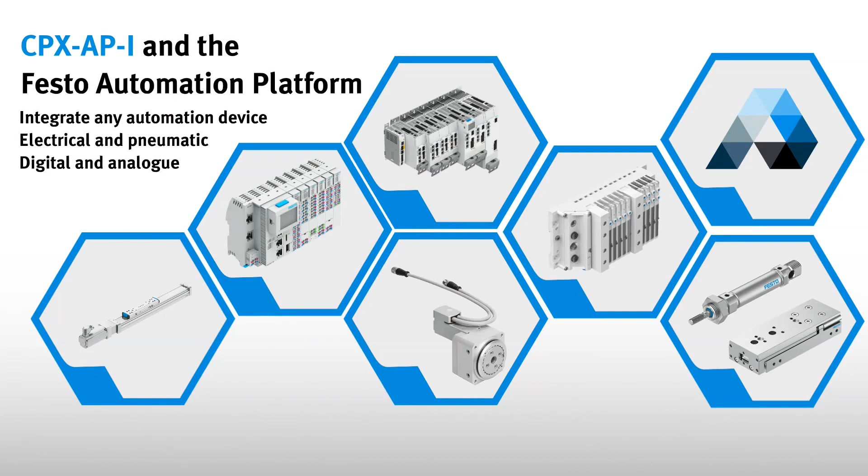Awesome. Hopefully you guys will have a better idea of this. Marcus, before you continue, why another remote I/O to the marketplace? Why is there a need? Russell, that's actually a very good question, and it's quite easy to answer.

We want to add value to the customers, and the majority of our customers use our pneumatic valves. And yes, there are other people that manufacture remote I/O, but our benefit is we can get direct access into the more cost-effective valve terminals, getting things like valve cycle count, cable quality monitoring, all of which the other competitors can't. So it gives you the added benefit of reduced equipment in the pneumatic factory automation space. And from one supplier, I suppose, eh? One supplier, everything can be done.

Fantastic. Thanks, Russell. So when it comes to the AP-I, it's our standard new technology. We're actually incorporating this new AP technology, which is high-speed technology, into all of our equipment, from our normal CPX valve terminals to the CPX-AP-I Remote I/O. And looking at industrial automation and where it's going, Industry 4.0 is what we need to take into account. And this is where the CPX-AP-I remote really comes in. It enables big data, high speeds, taking all that data and diagnostics from component level, as simple as a valve, up into the cloud.

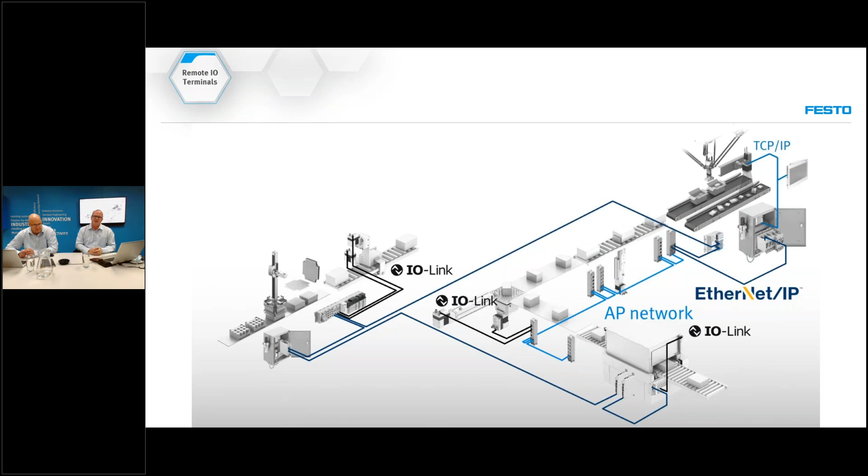So that's 30 times 4 IO-Link devices on one master. So for those of you that don't know what our competitor products look like, that's what you see in the industry. IFM, Siemens, they all have this type of technology. So what makes ours, like you said, better or more suitable for you guys?

So if we look at it, it's less interface cost. We can go directly into a valve terminal without needing a separate communication module. I'll show you now where we can save about 200 euros. So I'm going to compare against Siemens at the moment because, let's face it, they are the biggest in the industry. So let's benchmark against the big guys and let's see if we can knock them out.

So now we look at our competitor solution where they've got a Siemens PLC. Both our solution and theirs have a Siemens PLC. Same amount of I/O and valve terminals, and our solution ends up 200 euros cheaper. 200 euro? 200 euros, not 200 rand, 200 euros.

Plus, we've got the option of being able to send that data up into the cloud with our CPX IoT unit. We also have, like I said, that benefit of valve cycle count. So now we can start doing predictive maintenance for when a valve is deemed to reach its life end. So you can start preventing failures and downtime. So with our remote I/O, we can actually derive the true benefits of a valve terminal technology as well.

That's correct, yes. So you don't need to go for the flagship CPX valve terminal that gets all that diagnostics. You can use the VTUG that's assembled locally in Isando, as well as the MPA-L, which is the most cost-effective valve terminal. That's good to hear.

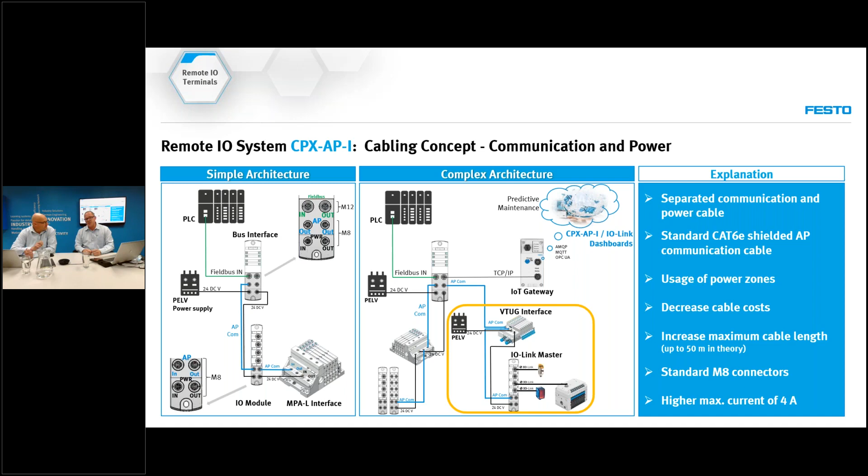So we don't use specialized cables, a single cable where the power and the comms is in one. We use standard M8 connectors, which means standard cables. Once again, easily available and a lot more cost effective. Are you limited to distance then? We do up to 15 meters between modules, and we will be releasing the 50. That's 50 meters between modules. Sure. So that really does give it to you.

So yeah, let's have a look at the last knockout to give that punch up to the big guys. So compared against Siemens, we're 8 times bigger in terms of network capability, double the speed with a lot more flexibility. And of course, we can then go directly into the valve terminal without the additional modules.

So the last benefit of this CPX-AP-I remote is what we refer to as steady architecture. And that means for you as OEM, you build machine 1 for customer A that wants one type of PLC, and then you build machine 2, the exact same machine, for customer B that wants a different PLC. Now you have to change all the hardware down below. Well, if you standardize with Festo, you don't need to.

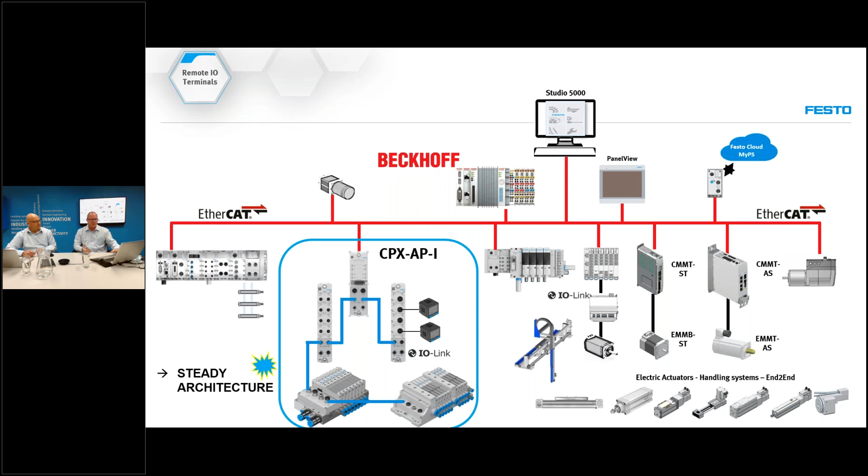Anything below the PLC, all that we do is we change the main protocol, the bus, and then from there, you've got all the same. So whether you've got a Beckhoff, a Siemens, or perhaps an Omron, we just change the communication protocol. That means you can build the machine faster, reduce your spares, reduce your stock holding, and the only thing you need to change is the PLC. So drawing, stock, all of that stays the same.

All right, so why is this such a good device? In the presentation, you're more than welcome to read through some of those. But at the end of the day, like Russell said, it's one supplier, one stream of components, and it's just a lot easier and simpler to install. But that's enough about me on the CPX-AP-I. I'm going to hand over to Russell on the DFPC.

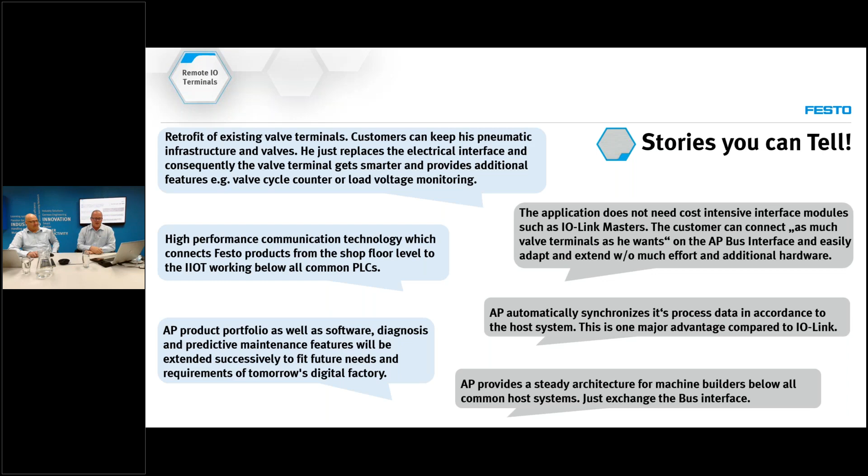Teach me, Russell, what is this DFPC? Okay, well, it's Festo's new generation compact linear cylinder, but it's designed around the process automation industry. So Festo, as you know, has a whole variety of pneumatic cylinders, which are used in typical factory automation applications. But what we have been lacking for the last while now is a compact cylinder.

As I said, compact; they often call it the pancake cylinder because there's very small end caps, but a cylinder designed around the process automation industry, specific to it and at an affordable price. And this unit itself does the trick. Let me show you why, Marcus.

So if you take a look at the offering, we have the DSBC, DSBG range. It's ISO-based cylinders. And now the DFPC comes in between, so it fits both the ISO 15552 protocol as well as the ISO 5210, which is the ISO standard itself. So it means that we have a cylinder that can work for both ISO standards, and its design purpose is set for the process automation industry itself.

It does mean, though, that the DLP, which you have come to know, is being phased out. And as I said, that was a more expensive offering to the marketplace. The DFPC is between 40 and 50% less than the DLP, which is a significant saving. It's a lot of money. That's a lot. All right.

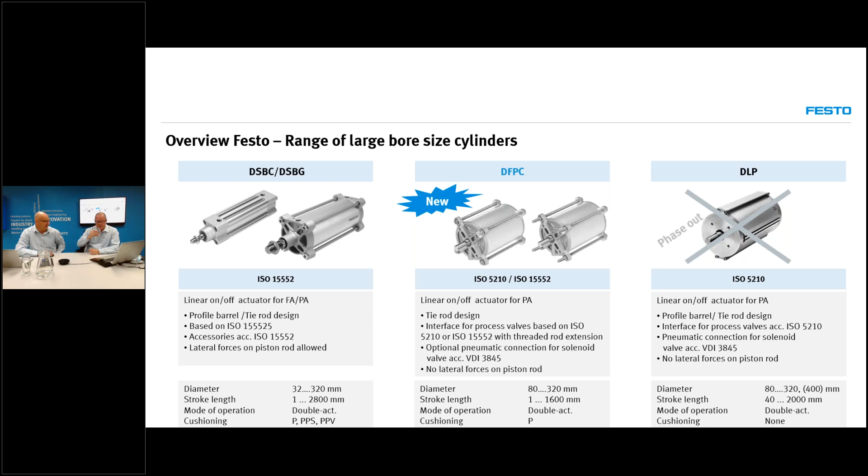If we take a look at the design, what's very different about it, and as I said, I referred to the pancake cylinder design, it has very thin end caps, so it's not meant for lateral loads, and it doesn't have a bearing cap. So like a typical cylinder, you can apply a lot of load to the rod, and it's supported by the bearing cap in the front end. This doesn't have that. But the application is designed around the process valves.

So it sits with, for example, a knife gate valve, where there's no linear or lateral load in the rod itself. It's guided on the outside. Guided by the outside. Exactly. All right. And this design, of course, optimizes the production cost and the selling prices itself.

So as I already mentioned to you, typical applications are things like knife gate valves, slurry valves, pinch valves, penstock valves, and butterfly valves with side crank mechanisms. So you can see it really is designed around process valve suppliers and process valve manufacturers and those who want to automate their process valves.

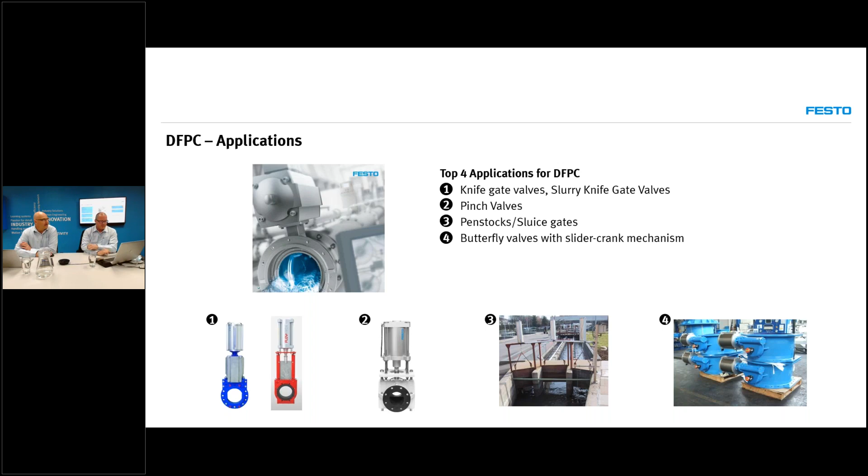And already we have signed up some very large international agreements with suppliers of these into the industry. So it's showing that the item itself is getting lots of traction. Okay. Thank you, Marcus. All right, let's take a look at some of the features.

So it is currently in double acting, guys, but there is talk about going into single acting at some point in time as well. The piston diameter sizes right now are 80, 100, 125, and 160, and soon to be released is a 250 and 320. I apologize, the 200 has also been released right now. So that's a 200 diameter cylinder, quite a big boy. Yeah, right. And the stroke length is up to 2,000 millimeters. So already we can cater for all process valves out there.

As I said, it has two standards it can facilitate, namely the ISO 5210 and the ISO 15552. It also is configurable. Like all Festo products these days, if you go to the website, you can configure it virtually, and you can extend things like the threads in the front end of the cylinder. So you can extend the mounting threads. You can change the thread on the rod, and you can extend the rod itself. So if you have a purpose-designed process valve and your standards are slightly different, Festo can accommodate you with a configurable tool, simple to use.

Right? Very interesting. Then it comes with ATEX certification, and it has a whole assortment of accessories. Because it shares common platforms, the DSPG and the DFPC, it has the same integrated components. So we can share the same mounting facilities or kits as well. Okay. So it really is an optimized design cylinder, and it's a modular concept. Let's move on.

As I already mentioned, there are a whole bunch of accessories for it. Taking a look at the front end, we have a whole bunch of rod accessories. So it's far more than what you find in the industry. There's a lot you can do with the front end.

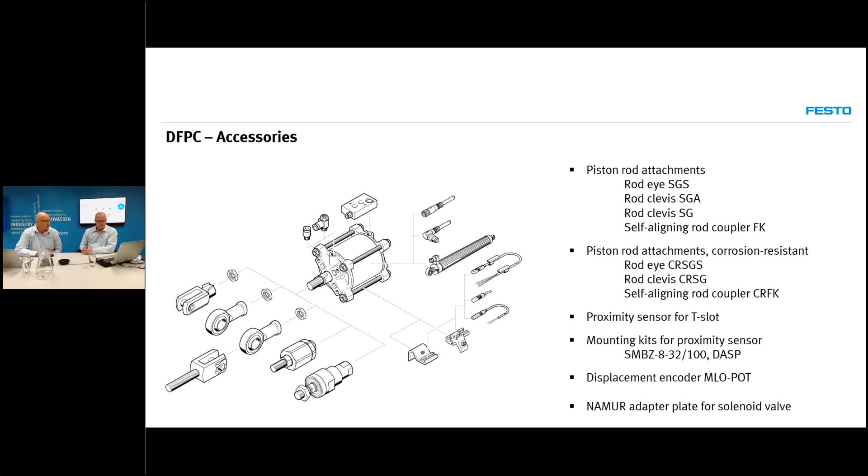All right, Marcus, that's enough said from my side. Over to you. Russell, you were mentioning something there about Namur. What is that Namur? Because to tell you the truth, I've got a Namur output on the PLC just now, and I wasn't sure what that is.

Okay. Marcus, it's a specific interface that is in both mechanical and electrical. In this case, mechanical, which allows you to have a standard in the industry to mount things like pilot solenoid valves to it. So every supplier who has it as a specification, you can take a Namur interface valve, and you can actually mount it to the actuator without any additional pipe work and so forth.

Okay, interesting. All right, but enough about PA for a while. Let's have a look, and we're touching base on simplified motion series. So you might see me trying to scurry here, it's just so that we ensure that we keep to time. All right, so what is the simplified motion series? It is what I call the bridge between electric motion and pneumatic motion. So when you want the accuracy and the consistency of electric motion without the price tag that you normally get with these servo systems. But if I look at the screen, those devices look like pneumatic devices.

Some of them do, yes. And that's the whole thing about Festo. We've tried to use the same mechanics, and all the mechanics that you see on the simplified motion are the exact same as what you can get standard, where you can use either standard stepper or servo equipment. So if you look at a standard, let's say a 50-bore pneumatic cylinder, we've got the electrical cylinder version. If you look at a rodless cylinder, we've got the belt drive version. So exactly what you've got in the pneumatics, we've got a direct replacement on the electrical side.

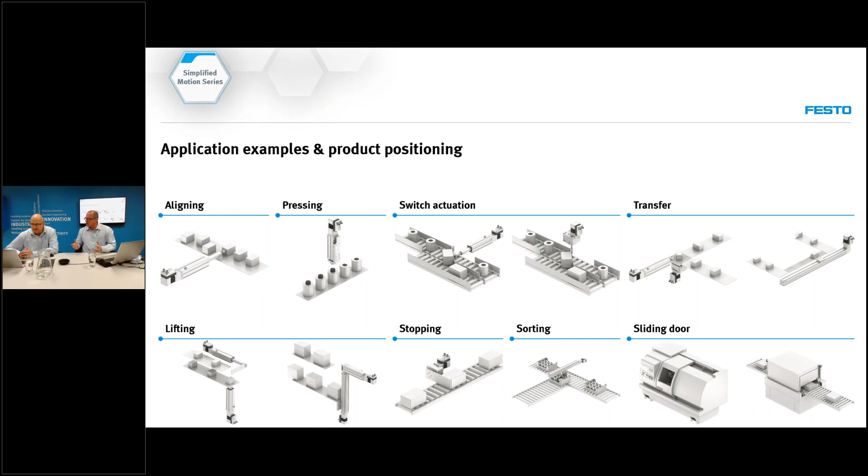So if you want to transfer maybe from left to right, maybe pick it up on the top level, a stacking type system, or if you want to stop a product in the line, this is where you can use the simplified motion. So this is the equivalent of a pneumatic on-off application, right? That's correct. Okay. But there is a little bit more, and I'm going to touch base on it now. All right. But to bring it into line and context with pneumatics, let's have a look at what you need from a pneumatic perspective versus what you can do with the simplified motion series.

So you'll see on the top there are PLCs on both the pneumatic and the electrical side, but what's below it is where it's different. If we look on the left-hand side, where the simplified motion series is, there's one axis, one part number. So it's the motor, the axis, and the controller in one. So it gets its supply and its control from the same PLC. And if you compare that to the pneumatics, we have our supply being the 6-bar air pressure.

So that'll be the 24 volt. Now for the pneumatic side, you need a pressure regulator. You then need a valve. You then need piping to the cylinder, and you have to do flow controls, and you have to incorporate the sensors. So now you've got 1, 2, 3, 4, 5 components, where with the Simplified Motion Series, you've got one component, one axis, one part number. So reduced maintenance, reduced installation complexity, and it's really designed for very simple applications.

So I'm going to share with you 2 applications that we've done in South Africa, and just quickly touch on the benefits, what were the USPs, the unique selling points. On the left-hand side, we look at where we're dosing food into a conveyor. What we could do there is get rid of the pneumatics that were becoming inconsistent because of the temperature changes in the factory. They were getting condensation in the line, and that was causing problems with the valve in the cylinder. Now with this electric cylinder on there, they had positional feedback throughout the whole stroke, so they could measure the status of the flap valve.

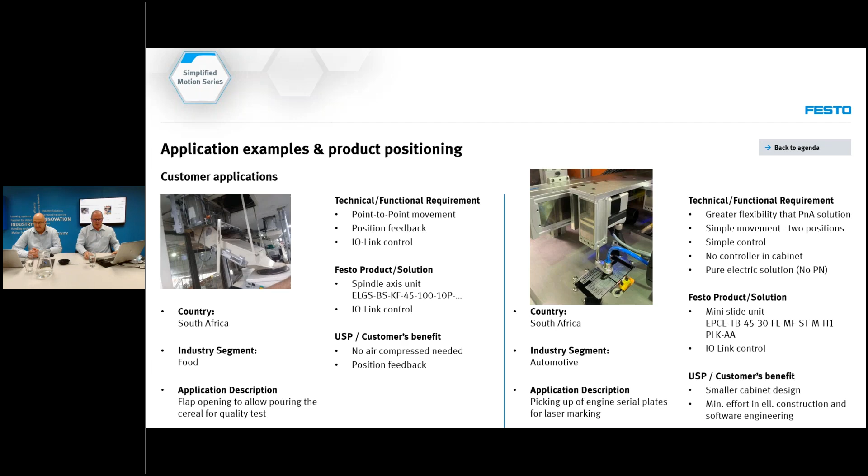Then looking at some of the new benefits, from Q3 this year, you get a parallel kit for more space constraint. So once again, let's just recap. Control with 2 signals, one to extend, one to retract. You get signals out that simulate proximity sensors once they're in those positions. And you need no laptop. All of the configuration is done on the keypad, on the actual controller itself. So no laptop required, no high levels of skill. And of course, by using IO-Link, you now get advanced features like midway positioning. So it's no longer just 2 positions. You can now have what they call an intermediate position.

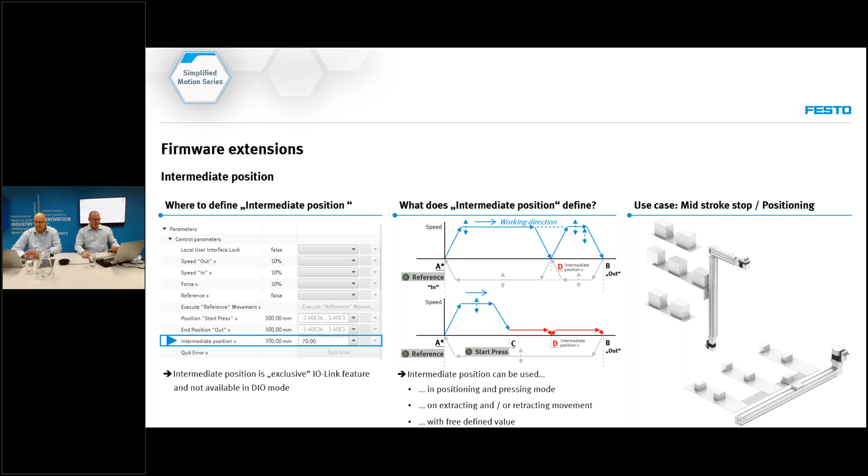Then the last thing I wanted to bring to the table on Simplified Motion Series is the actual software to size this. If you go to festo.com/SMS, you get the SMS Designer Studio, the selection software. All you need is to know your actuator type: a cylinder, a belt drive. You need to know the stroke length. You also need to know the mass. So let's say we want to move a 1 kilo pack at 500 mil, that type of data. You use the sliders on the website. It will then give you the selected size Simplified Motion Series unit.

You then click add to basket, and it'll give you the optional extras, say a rod clevis, etc. And you say order, simple installation. So now you've got a simple solution for simple applications. The ordering process is simple. And enough of this simple guy talking. I'm going to hand back to you on the DFPI.

Thank you. I must confess, Marcus, I played with the software last night because I was very intrigued, and it is really simple to use. That's the whole beauty of it. It takes the mystery out of electric automation, electric drives, and it provides you a simple solution, but a guaranteed solution. Yeah, a guaranteed solution, exactly. All right. So the DFPI is Festo's proportional linear cylinder.

Right? The pneumatic version. Pneumatic version, all right. And it's been designed specifically with mining and harsh conditions in mind. In other words, it's been designed for very crude, rough conditions where you're exposed to environmental factors and chemicals and wind and rain and so forth. So you don't have to house it inside some pretty cabinet. It's designed to work outdoors.

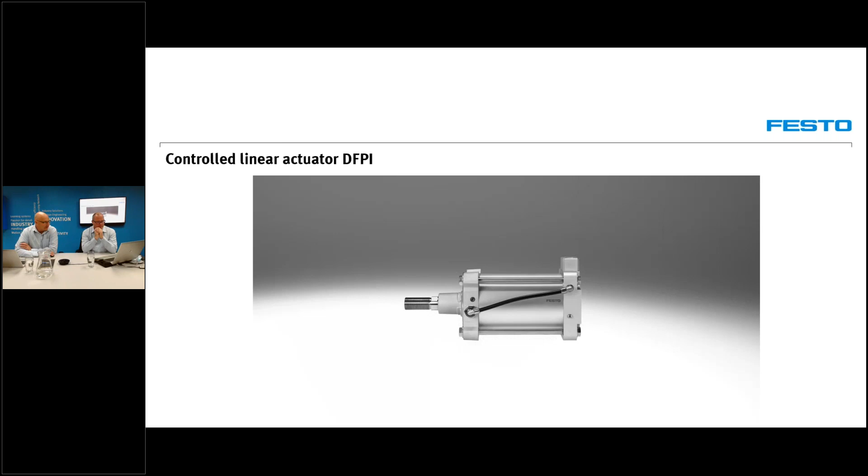All right. It's been around the marketplace for a while, but I thought it's actually very relevant to discuss it again now because we've had lots of interest in this unit recently. All right. So it comes in 2 forms. All units come standard with an integrated potentiometer. And the second unit comes with an optional position controller. In other words, inside the same housing is a pneumatic position controller itself.

All right. So you don't have to pipe on an additional one. Exactly. Not just that though, everything is now housed inside this protective housing, so it's kept away from the elements. So it really is versatile. If we take a look at the design, the potentiometer, as I said, is standard. It's inside the actual housing itself, and then to the rear end on the image, you can see where the positioner is, and that's the optional part.

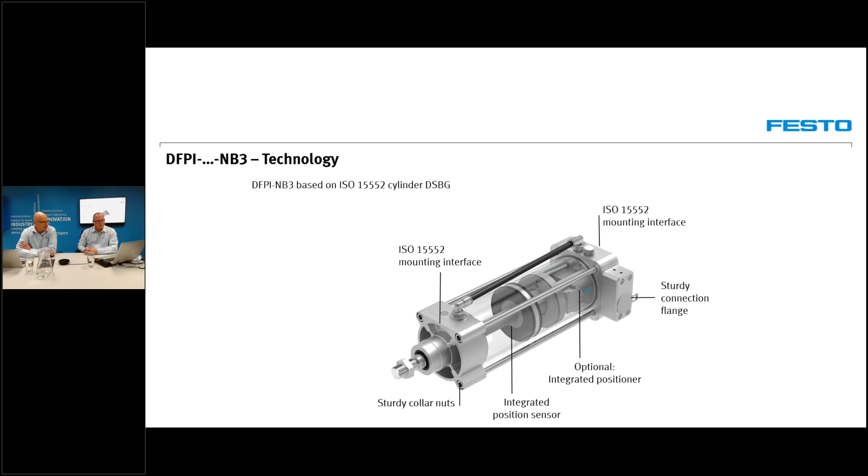And it conforms to the same DSBG ISO standard cylinder. So it's a very rugged, robust unit. They actually took the DSBG and re-engineered it to accommodate all these components. So by no means is this level of sophistication compromised. In fact, you have the same durability and robustness of a product, but just with more control. So as I said, it's been designed for very harsh conditions, but also it's been designed with accuracy.

Is that the same as what you normally see when they do these whiskey things that rattle and clink because they're worn all over the place? Yeah, pretty much like that. You find this system actually in the mines for dart valve control. And it's sort of become an industry norm over the last couple of years. And actually, we're having great success in retrofitting our units to these because the control we get from ours is far, far better.

You can imagine, Marcus, if you're exposed to all these environmental conditions, the mechanical linkages become worn and vibration settles in and starts making things move out of alignment. So you're always recalibrating things and trying to tweak and tune things, right? And then, of course, in the plant environment, people step on things, break things, knock things by mistake. So it is a real nightmare. If you want proper control, you need to calibrate the whole time. And besides all the linkages you require, it's very time consuming.

Yeah. So all that is now thrown out the window because all the feedback that you require is now electric or electronic, and it's inside the actual housing itself. So if you've got better control, you've got better output. If you're trying to control something like a precious metal, like in the case of the mines, you have better recovery or better yield as well. So better control leads to what? To economics, to financials. You actually see the benefit in your pocket because you have better product and better yield.

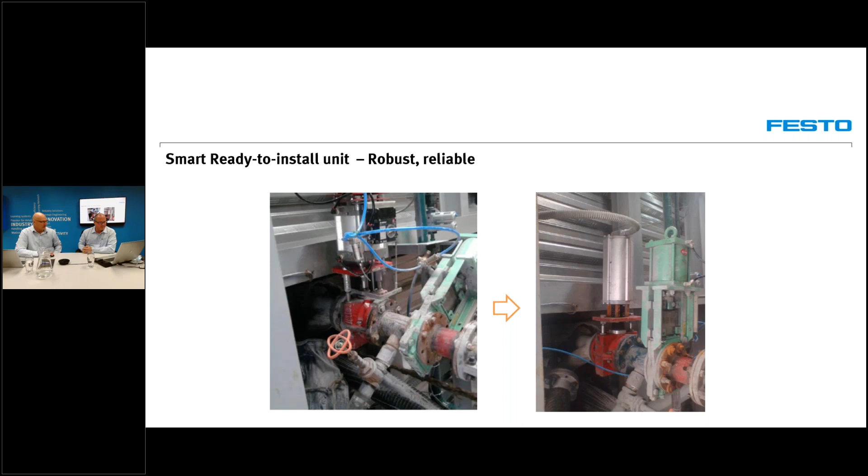And let's try and click through again. And in terms of accessories, let's go back a slide. Sorry, Marcus, I'm navigating on your PC here. Because we have it as part of the DSBG range, all the accessories that are available for the DSBG are available for this. So take a look here, Marcus. You have a whole assortment of front rod clevises, mounting attachments. You have all the sensor control, everything you could possibly think of.

And unlike the DFPC, where you're limited to horizontal and vertical applications, and of course the actual rod is guided, this can take the side load because it has that leg push. And as I already mentioned, this black tube, this conduit, houses all the electrical cables and pneumatic tubes inside there. So everything is kept away from the harsh environments. And then you get that standard from us. You don't have to filter your own cable through there.

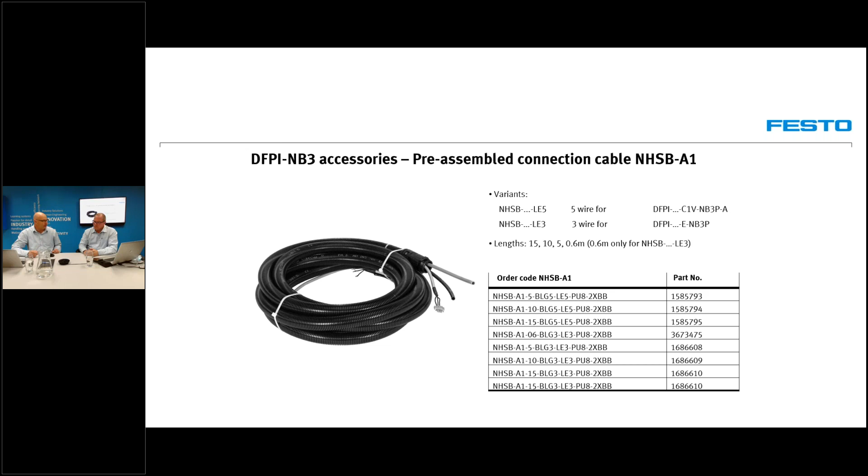Precisely. And I have seen this in real robust applications. The whole entire unit has been covered with material, dirt, slurry, and there's been no penetration of environmental conditions into the tubing and the positioner itself. So it really is meant for these rough applications. But you don't necessarily have to always have a unit with a positioner inside. You can choose to also have it outside.

So we have a bracket system that allows you to mount a Festo positioner, but for that matter, you can mount a Siemens, an ABB, a Samson, whatever you choose to use, outside. So you can attach the brackets to the cylinder itself, the profile, or of course you can choose to mount the positioner in a cabinet somewhere. So very flexible.

So if you think about it, you can have an integrated positioner, you can have the positioner externally mounted onto the actual actuator itself, or you can have that cable up to 15 meters long and mounted in some panel if you want to. Very interesting.

So as I mentioned, it's really a product that's very good for all industries, so chemical, energy, mining, and water, wastewater. So from louver applications through to pinch valves, dart valve control, turbine adjustments, anything that needs to be proportionally linear controlled, this is a device to use. And we have some great success stories from live applications. So burner control typically found in steel plants, to furnace control dampers, all controlled by the DFPI.

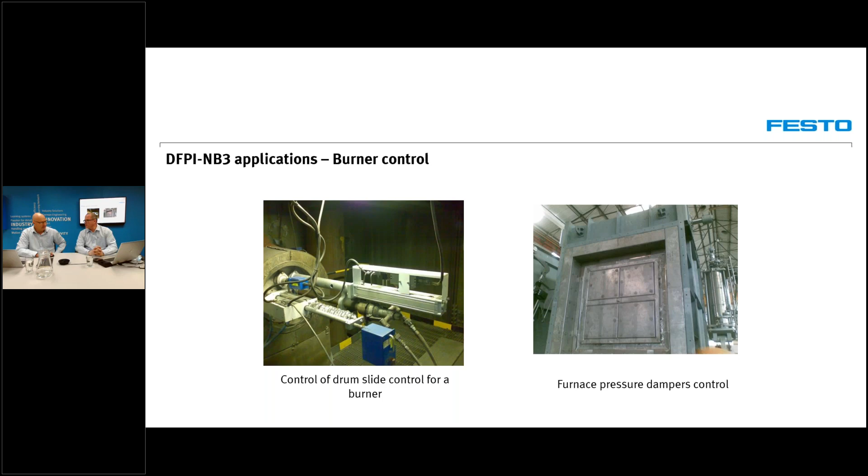Looks like you were traveling the country taking nice photos of all of these applications. No, my job's fantastic, man.

All right, fertilizer production, mineral processing, it really has a multitude of applications. And this traditionally was really a difficulty in the marketplace. Water, wastewater, pulp and paper, and once again, the mining applications. That's a float cell on the right-hand side, Marcus. So we can say that we've actually put it in there. It's not a catalog. It's working. We've got the yield. It's done. It's dusted. It's proven.

It's a proven product, both internationally and locally. So we have some fantastic local stories both in South Africa and Africa. So we really have full confidence behind the solution. Awesome.

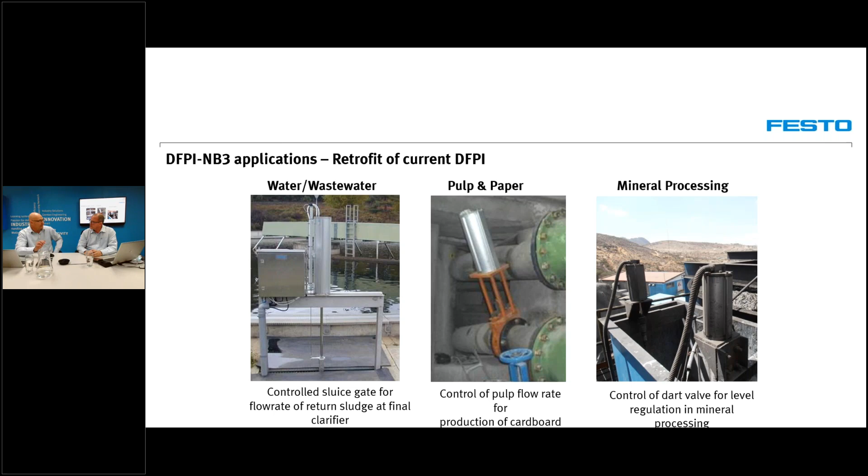What's a fail-safe? Right, good question. Thank you, Marcus. So traditionally, when it comes to pneumatic control, people wanted to fail if there's an air failure, fail to extend or fail to retract. In other words, they wanted to mechanically fail.

Oh, it's not if it's going to fail. So it's not going to fail. Of course, it's not going to fail. It's a Festo product, Marcus.

You put a spring pack either in the front or the back end. So imagine, for example, if air falls away, the cylinder either extends or retracts, as you wish. But in Europe, and I think a growing trend in South Africa too, is that mechanical spring packs are rather dangerous because if you open the thing up, of course, the springs are at a high force. Exactly. And there actually have been some very nasty incidents in the country itself.

So it actually isn't a joke. So what we do in our case, we add an air receiver plus a pneumatic circuit. Okay. So you can imagine, for example, if air fails, you have this receiver called an air battery. And that will then, of course, cause it to extend or retract and actually perhaps give you multiple cycles that you wish to manually override if necessary. So the same as what we would do with the UPS on the electric side. Precisely the same concept. Thank you.

Okay. Marcus, so I believe it's your turn now. I think so. Let me wow the guys with the CPX-E.

So if we look in all the industries, whether we're looking at food and bev, food and pack, the automotive industry, even the mining industry, PLC is control, and that's what we need. So the CPX-E modular PLC is not just a PLC, it's a motion controller as well, and also has the added option where you could create your own remote I/O panel. So the CPX-AP-I is IP65 remote I/O for mounting on the side of the machine. With the CPX-E, you could create an I/O bank, put it into a panel, and wire everything into that. So Festo even gives you both options.

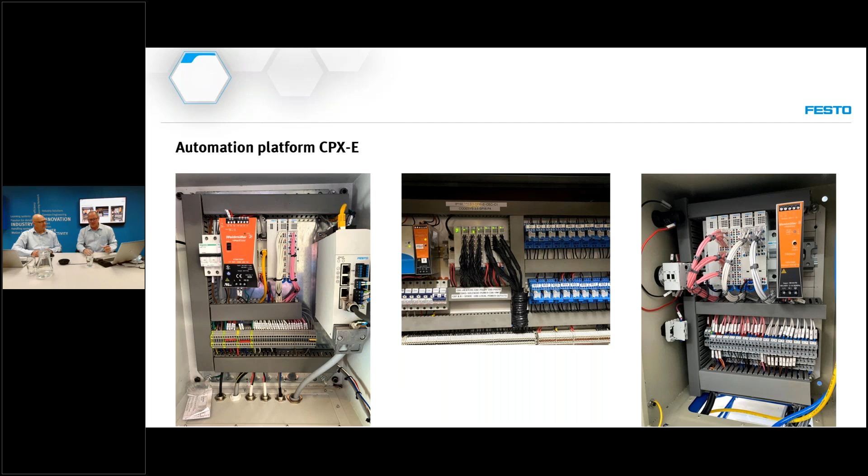So with that being said, if we look at our complete architecture, we have an EtherCAT master on these PLCs with an Ethernet for the HMI and of course vision systems. Festo has their own vision systems, and the EtherCAT master, which we can then connect to either our own servo drives or extra low voltage servo drives or third-party equipment. And I'll show you that a little bit later as well. I'm also led to believe that EtherCAT's particularly fast, right?

It is by far the fastest and most stable communication protocol, in my opinion, out there. And it's also the easiest. You know, when you have 30, 40 modules on, right-click scan, and everything is there, you've got your network configured in minutes. I've challenged our application engineers to prove to me that within 5 clicks in the Festo Automation Suite you can have everything set up, and it is 5 clicks and everything is set up.

Go onto our website, go to the support portal, download Festo provided by Codesys, the latest. All the function blocks are there. The only thing that you might need to pay is if we have to bring in third-party function blocks, but that would be with any Codesys provider. Some of the software providers out there charge you an arm and a leg for software. Some of the guys are charging anything between 70 and 90,000 per year in update costs. So how many PLCs can you buy with that?

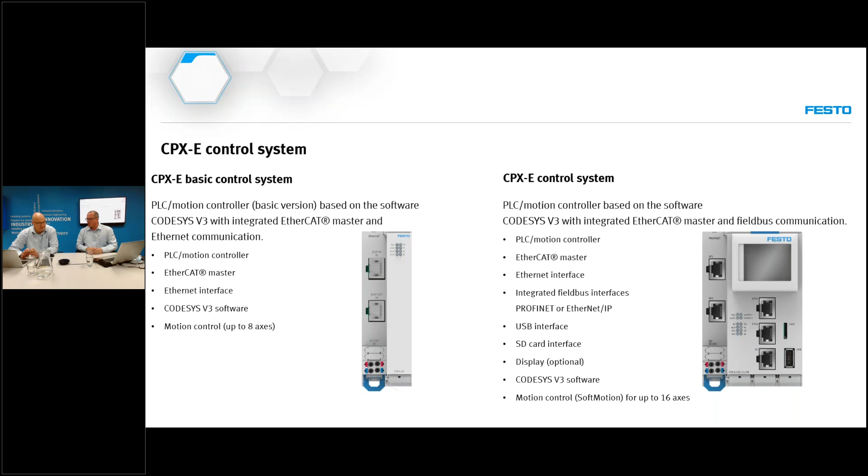So on that, you get 2 versions. You get a C and an M. C is standard, that's the normal PLC control, and the M is the motion. So if you want to do motion control, you take the M version. Once again, no additional licenses, no additional costs.

So I did say in the beginning, you can create your own remote I/O terminal or remote I/O bank. You can do that with Profibus, Profinet, EtherNet/IP, and of course EtherCAT. So it's not just a PLC. No, you can create a separate standalone where there isn't a PLC functionality. It's just a communication module, and you can create an I/O bank. Okay, so you said Profinet, help me out here, Profinet? Profinet, Profibus, yeah. EtherNet/IP, and EtherCAT. Wow, okay.

All right, then a quick overview of what the inputs are. This is where I saw the NAMUR, and I didn't understand why, but you did explain that, thanks. So standard input, 16 digital in, 8 digital out, as well as the NAMUR NE21, so it's in accordance with the higher current rating for the NAMUR valves out there. On the analog side, we've got 4 analog in and 4 analog out. The nice thing about our analogs is they're both current and voltage, so you don't have to have 2 different. It's configurable. You can either have 4 to 20 or 0 to 10, all in the same. So with 4 analog out, you can have 2 current and 2 voltage. You can have 3. You can adjust it as you wish, reducing stock holding again for the customers.

Just talking about PA now, I know that recently they launched the PA toolkit. That's correct. So there's a set of function blocks written specifically for PA applications. That's correct. Wow. So the PA toolkit comes with the HMIs. It's the visualization and the Codesys package that is the industry standard out there. They're still developing that, and look out for the webinar specifically on that, because that's an interesting topic. I think we can do a webinar on just that.

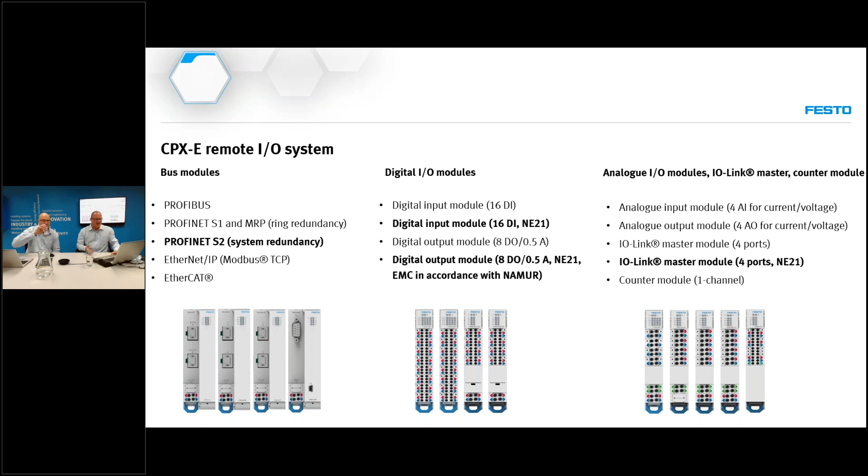Sounds good. Awesome. Then the IO-Link cards, of course, 4 IO-Link masters, and then the encoder card. One of the benefits of these is, again, space saving. So you look at about a 30% width reduction in these. If you compare it to, for instance, a Siemens, we're about 20 to 30% smaller in size for the same amount of IO.

I'll just tell you now, with the cost of panels these days, every bit of saving you can make is a saving you can use. Exactly. Panel cost, if you can make the panel smaller, you save cost.

So you can either have a complete system from Festo where you look at the PLC, the HMI, the IO-Link, the valve terminals, and third-party equipment like the PA equipment, your process, your positioners, your feedback, all of that. You can actually run this as an intermediate, as we said, with a slave, where the main PLC does control, and you do perhaps IO-Link control down in the field.

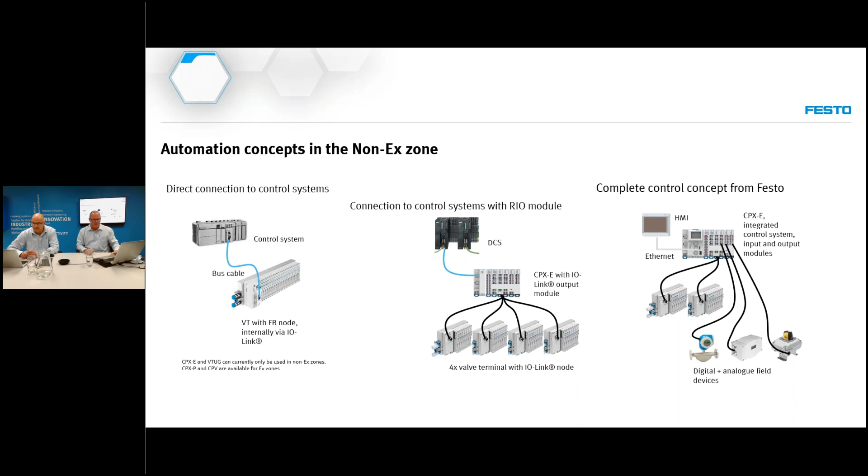One of the nice parts about the installation is the bridging capability. So you don't need to run 24 to each module. You can just jump and daisy chain. It does give you nice flexible ports. So it's easy. You've got an in and an out port to chain your 24 volt. Once again, just making installation cheaper or easier. I shouldn't use the word cheap. Nothing's cheap nowadays. And when we look at time, time is expensive and we want to reduce time.

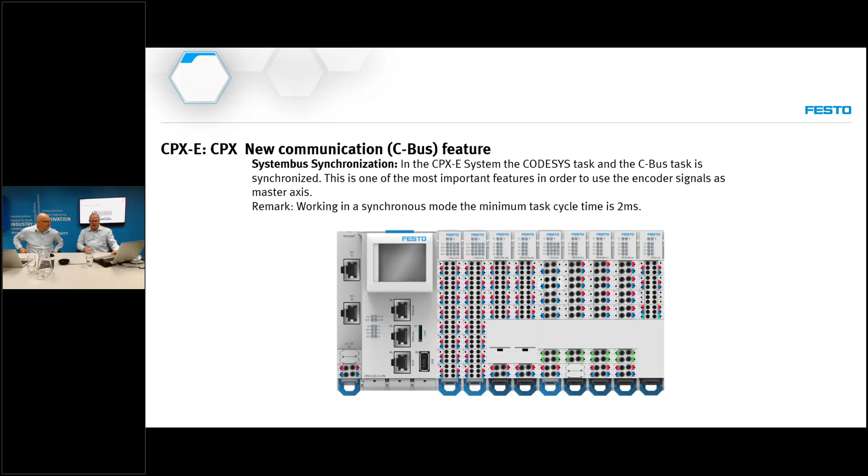Talking about time, if you look at this PLC, because of the C bus running at the back and having synchronized clocks, we can have a scan rate down to 2 milliseconds on these PLCs. That's amazing. So quite a nice, powerful little PLC, modular, and it caters for all of your needs. I can see me using that component in my process industry. Definitely. Would you be able to use that PLC in perhaps your DFPD? Well, it certainly can control the DFPD. Let's do it right now.

So Festo's range of quarter-turn actuators is growing, and I'm going to touch quickly on what we have in place. And we have had it in place for a bit now, the DFPD, and the extensions to the range are very exciting to talk about today, Marcus. So let's climb into it.

I know it's called a quarter-turn actuator, but it actually can do more than that. It can actually do 180 degrees. So for example, if you've got a multi-port valve, this same series, the body's slightly longer, right? And the rack, of course, inside is longer, but the same concept, the same actuator can be used for multi-port applications as well.

It's once again very much aligned to the chemical industry and to the mining industry and to very harsh environments. We have an epoxy coated version as well, the EP version. So the entire unit itself has got an epoxy coating, and then the drive mechanism, the shaft, top and bottom, is also stainless steel. That's a shortcoming of a lot of competitors in the marketplace, Marcus: they're connected to process valves and there's spillage and environmental factors, and the actual drive mechanism rusts or corrodes, even though the epoxy coating is fine. So that's one thing Festo has as a standard.

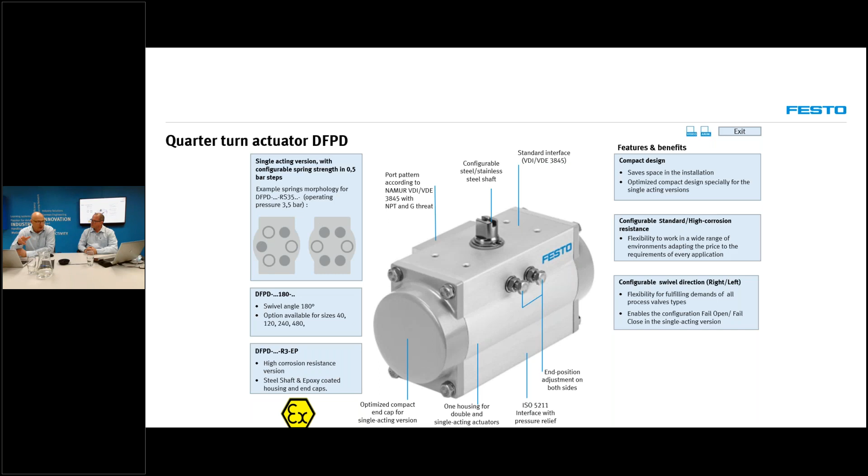What else can I think about? It's a compact design in general. So if you compare it to some of the players in the marketplace, it's a nice compact design. You can configure it online, once again, like the rest of our products. So you can choose whatever you want on the online configuration, but there also are standard versions. You also can choose to have it as open right, open left, in other words, clockwise, anti-clockwise. These are all variants that are available in the range itself.

Now, the exciting part is that we have released up until size 2,300, so from 10 Newton meter to 2,300 Newton meter. But in the next short while, we're releasing the 3,000, the 5,000, and the 8,000 Newton meters as well. But what has been released now is the heavy-duty version. So 9,000, 18,000, and 32,000 Newton meter.

A little bit more powerful than that Ford of yours, eh? Just slightly. Certainly a lot more powerful than the Toyota of yours. Is it as reliable as the Toyota? It's more reliable than your Toyota.

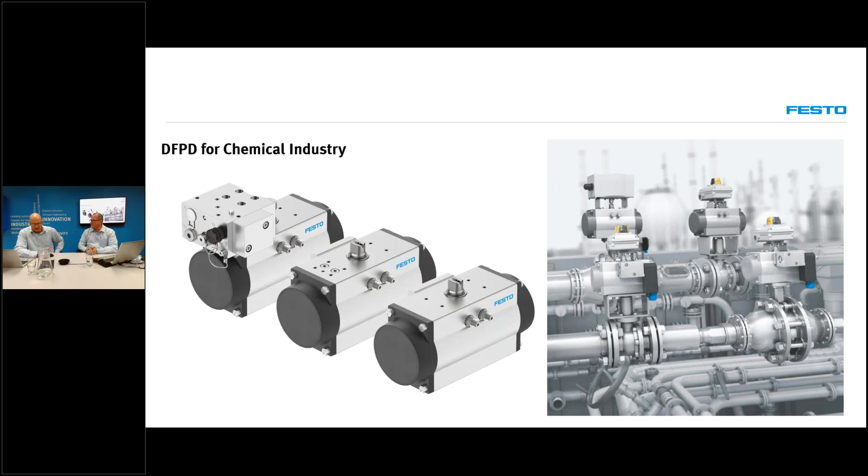Okay. All right. We also have released to the marketplace now the DFPD C, C standing for chemical. Oh, right. Not for corrosion. Not for corrosion, not for Corolla either. Now, the DFPD C, we'll talk in detail about this just now, but it really is an exciting product that we just released.

Let's just shift to the next slide. Whoops, and I've gone too far again. Marcus, you must help me out. You're too excited about this. I know, I've got finger troubles, yeah.

Okay, there we are. All right, so it's been designed specifically for the chemical industry. So it has a couple of things that the current range doesn't have. The end caps are hard anodized, right? The spring pack that I spoke about just now comes with stainless steel inserts. So in other words, it's not susceptible to the corrosion and to the outside conditions.

People always think that a pneumatic device works in isolation, but of course it draws in the atmosphere when it cycles. And that atmosphere contains chemical compounds. If you can smell it, it's in the air. Exactly. And often if you open up an actuator, you'll see the corrosion and the rusted spring sets inside. So we now have as standard in the C version stainless steel spring sets.

Plus it has a shaft centering ring for easy mounting to process valves, once again a request in the marketplace, and blowout proof screws. So this range looks very similar to the DFPD range itself. It is very similar, but it has those few modifications that make it unique to the industry itself.

And I'm also excited to say that they have brought one more innovation out, and that is now the same unit with the 3847 interface. Now, 3845 is standard across all the ranges, but 3847 is a special interface to allow it to mount components to the unit, as opposed to piping up a pneumatic positioner. That spider's nest we saw earlier. Exactly, and more so. You can now mount those components with a series of manifold components to each other, saving you lots of time and effort. So I'm quite excited to talk about it just now.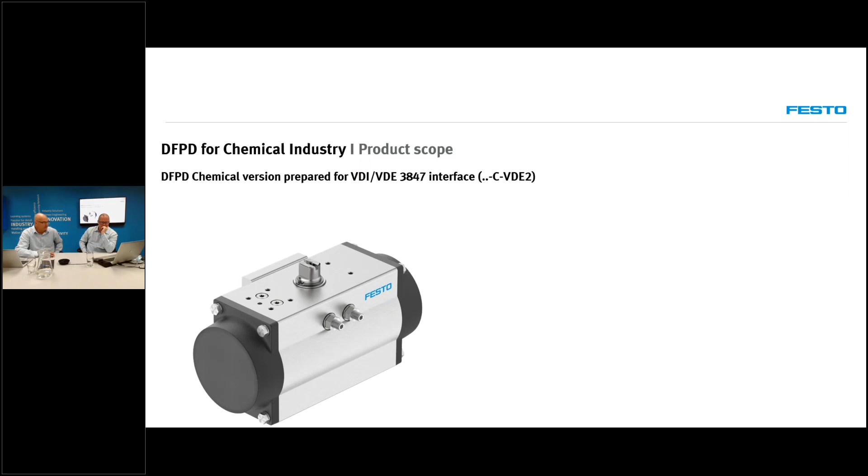So as I said earlier on, Marcus, we have a special manifold block assembly for it. That's the first unit. You can see it on the screen in a moment. And to that, you can attach, for example, the positioner. And then from that, you can attach regulators, shutoff valves, and so forth. Okay, so directly mounted, no piping required whatsoever. So this is really something truly unique in the marketplace.

And then carrying on to the topic of additions to the market, we have what we call now the heavy duty range. As I said, it's meant for larger torques. And we actually use the Scotch yoke mechanism or principle for creating the torque itself, right? It's available in single acting and double acting versions, and it has a manual override version as well. Okay, so this is now available to the marketplace.

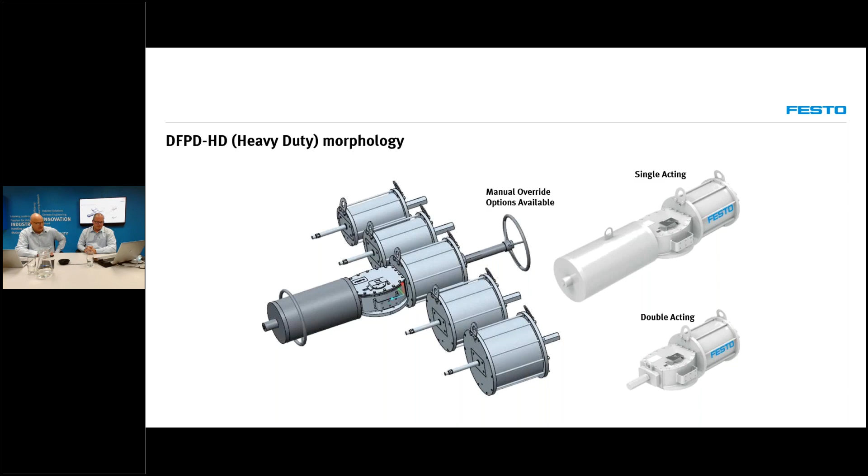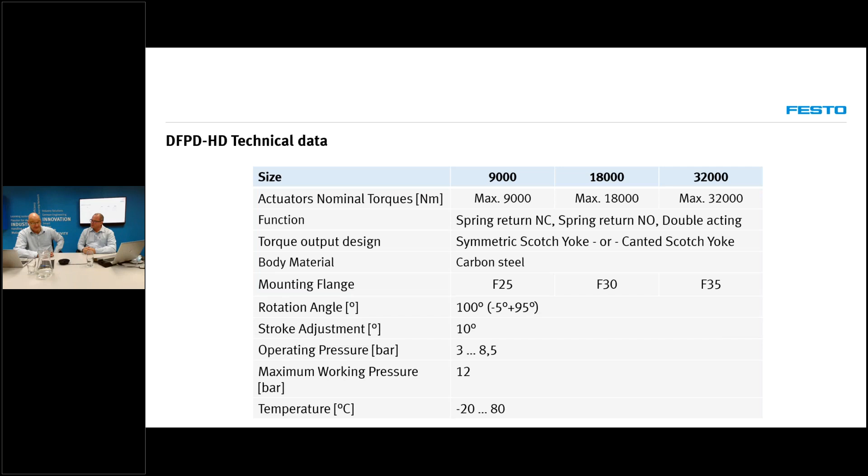I mean, these are really large units for very large high torque applications. So it's not just these small valves. These are meant for big valves. These big industrial valves. No, they are meant for large, massive valves. Exactly. So water industry, very interesting. Yeah, exactly. If you take a look at some of the specifications, as I said, 9,000, 18,000, and 32,000 Newton meters, and take a look at those flange mountings, F25, F30, F35. That's really large. Okay. So Festo does the entire range now, I believe.

Now, something else which I'm very excited to talk about is a CMSH. It's Festo's pneumatic positioner, but a new version. We've had one, not that other white one. What was that? The CMSX. The CMSX. So this is the newest release to our range, and it really has some very, very clever features to it. So why a new one?

The same as with the remote I/O. Why a new positioner? So the first CMSX that was brought to the marketplace has really done phenomenally well, and we've installed it in some big places like Sasol, for example. So it's proved its reliability, but it has limited and simplistic diagnostics and features.

It also is a 4-wire system. Right. This is where this 4-wire, 2-wire scenario comes in. This unit is a loop-powered HART 4-20 protocol. Okay, and that's what the market wanted. That's what the market's looking for. So obviously Festo has been listening keenly to the marketplace and saying, listen, I know you're happy with what we have given you, but you want a 2-wire system, this is it.

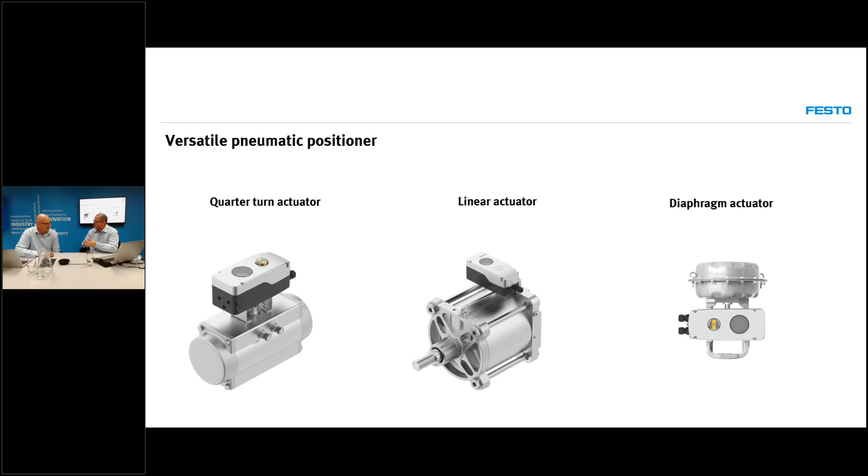All right. And obviously what they have done is they've taken the key learnings from development of the CMSX and put it into the CMSH. So the same units can be used for quarter-turn units, linear actuation, as well as, for example, diaphragm actuators. So it is a singular product with a multitude of applications. And you don't have to go and change the unit out to accommodate it. So one can do many, so it reduces the amount of stock you need to keep. Exactly, and the cost, of course.

We take a look at some of the features here. We just compare it to the CMSX. So CMSX, as I said, is a 4-wire system, this is a 2-wire system. This is a 4-20, 2-wire with HART. But take a look at things like this here. The CMSX was limited from -5 to 60 degrees Celsius. This is -40. I don't want to go work in that environment, I'll be honest. That's where the PA guys can go. We've got a large market in Russia in some very cold areas, and of course this is where it's used. So that's why we have gone down so low.

Sure. Look, I believe they're doing lots of vodka to keep warm at some markets. It's actually not that bad. We don't have any vodka. No, just water, I'm afraid.

All right. And as I said, the CMSX was for basic diagnostics and monitoring, whereas of course you have a far more advanced setup for the CMSH itself. All right. But let's go and take a look at some of these features now. So as I said, loop-powered 4-20, communication is HART currently, but there are plans to take it to other protocols as well. It also comes with EX certification as well. It comes standard with functional safety SIL 2, which is also something unique to the product range. Exactly. As I said, a very extreme temperature range, -40 to 80 degrees Celsius.

1 unit suitable for both linear actuation and rotary actuation, so you don't need to go and get different units for that, right? And it has a whole bunch of optional sensor options to fall in place. And also from 1 unit, fail safe, fail to open, fail to close, or fail in position. Once again, you don't need to go and purchase a different unit. So you can really consolidate stock here.

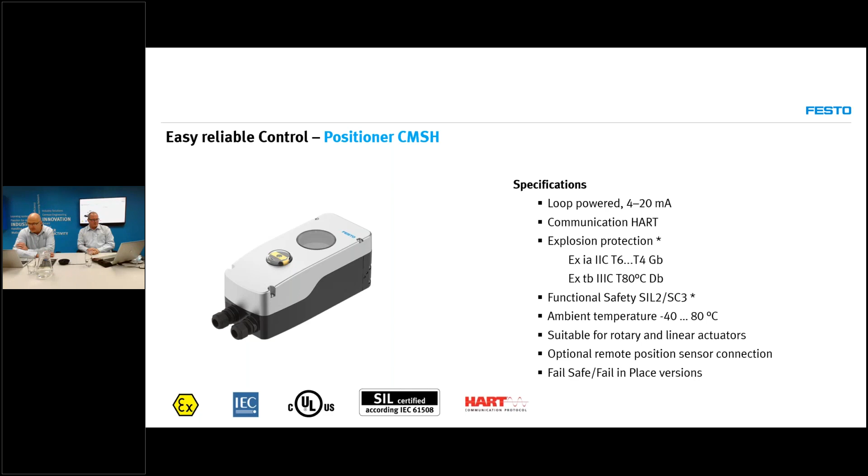So the secret behind how we can create this sort of modularity of functionality or limited stock is because we have these end plates which fit onto the sides of the actual positioner itself. And that provides you a single acting or double acting version. Okay. All right. So you can actually purchase it pre-configured from Festo as a single acting, if for example it's all you use in your factory, or as a double acting. Or you can choose one that can accommodate both. But you can actually strip the units down and then change it out if necessary as well.

Okay. So in your stores or in your facility, Marcus, you could have one CMSH unit for double and single acting and have multiple plates. And as your application changes, then set it up accordingly. Very interesting philosophy.

We take a look at some of the unique features here. So as I said, this system is, first of all, high capacity. So in the previous ranges, we had a high flow and a low flow. This is now, from the start, a high flow, high demand unit. Also, again, if I take a look at the opposition in the marketplace, they are limited. This is up to 400 liters per minute and 300 liters per minute for the double acting versions itself. So it really is competitive for large actuators.

So those big, large actuators I showed you early on, right? The heavy duty versions. They suck, yeah. Exactly. All right, but it doesn't, of course, compromise on your accuracy. As I said, it has both fail-safe or fail in position applications. And the other thing which Festo learned from its previous unit, and we were commended on the whole time, was the fact that it could take in dirty air.

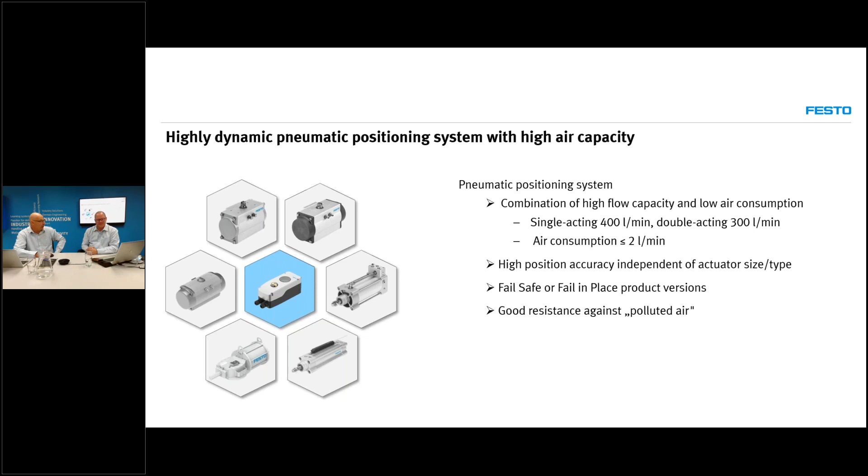And we know in Africa, we clean our air well. Hey? Yeah, we clean our water well. Yes, there's more water in those systems.

All right, as I said to you, this unit is modular, so you can actually get additional IO modules for it. So you can get binary inputs and outputs for it, additional 4-20 feedback if you wanted to. There are different limit switch attachments, so you can get inductive sensors or mechanical limit switches, so you can choose whatever your preference might be. And that functional safety unit is also an additional option, right? You just plug it into the system itself to configure it.

As I said, it has integrated self-monitoring and diagnostics. Inside the unit, it comes with pressure sensors and other sensors itself. So breakaway pressure, air leakage, you can do a partial stroke test. You can do things like real-time monitoring of positions, temperature and pressure, counter for movements. So all that feedback is once again available for you.

I'm just thinking about your remote IO now. Okay. You can take it to the PLC now. And this is information you want to get. Yes, definitely. Right. And of course, some of these things like breakaway pressure, air leakage can give indication when you're expecting a premature failure or something, right?

And then the beauty of it, it has simplistic feedback. So all the information is coming through the LED screen, right? But it's not written in code. So you don't need a Greek alphabet or some sort of science degree to understand it. Okay. It's in simplified plain English. Initialization complete, not spelled out in some sort of Greek philosophy.

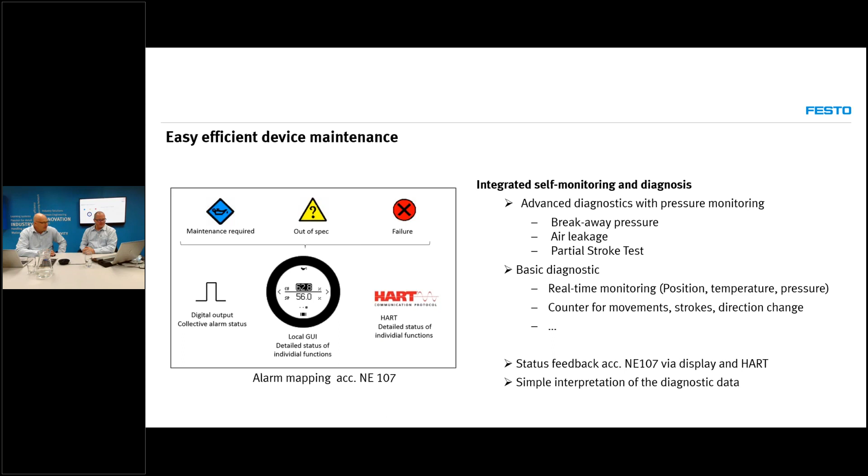So let's take a look at the SIL functionality of the unit itself. So often if you want redundancy or a SIL device, you need, of course, a PLC and a safety PLC. When you choose the configuration with SIL rating, it comes with an additional microcontroller inside, right? So then all you need to do is provide the signal. So for example, you don't need to have an additional safety PLC, right? And you don't have to have an additional shutoff valve to perform the functionality for you.

Right. So you actually can take off the shutoff valve, right, and the safety PLC in this application. Sure, that must be saving quite a bit. 100%.

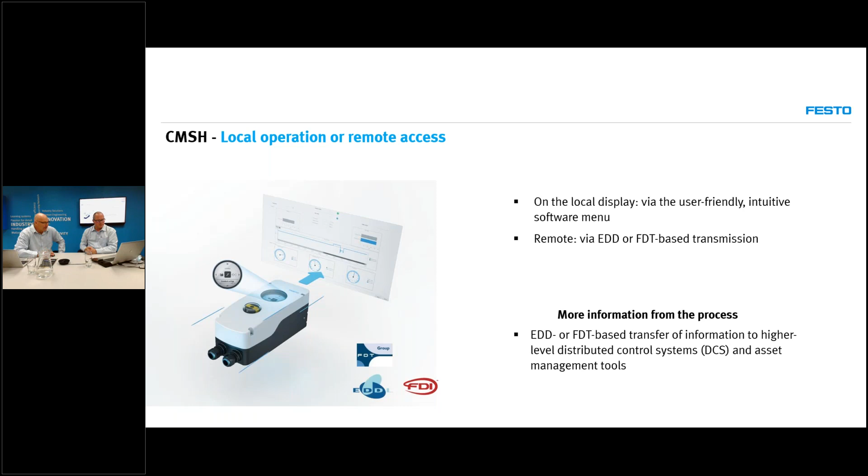I need to add that you can, of course, receive all this feedback to your PLC by the HART protocol, but you also can connect up with a HART dongle. So you can do parameterization on the screen itself, but it's also compatible with HART dongles. So you can plug it into your laptop and, of course, get advanced diagnostics and parameterization from the unit to your laptop itself. All right. So I'm really super excited about this. I think it's going to do particularly well in the marketplace, particularly with the way the CMSX has proven itself already.

And then growing on this topic itself, this is the VTOP. Right. This is the modular system I spoke about. Is this the one without the pipes? This is the one that saves you lots of time, lots of headaches, and lots of costs. So in an installation that you might find at a chemical plant or mining plant, there is virtually always a filter regulator next to the positioner. Then there may be an emergency shutoff valve. Then, for example, you may need an additional pilot there because there's a large volume of air required to move the actuator. It's a large actuator. You might need an isolation valve. And all that now is integrated into this new system.

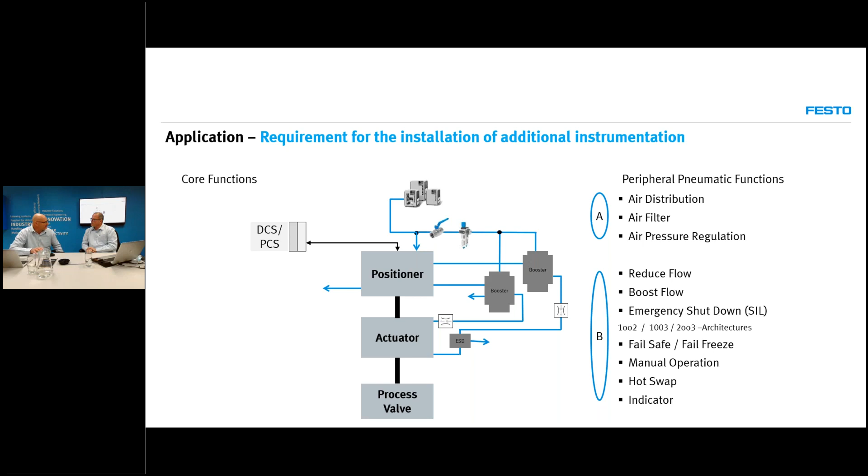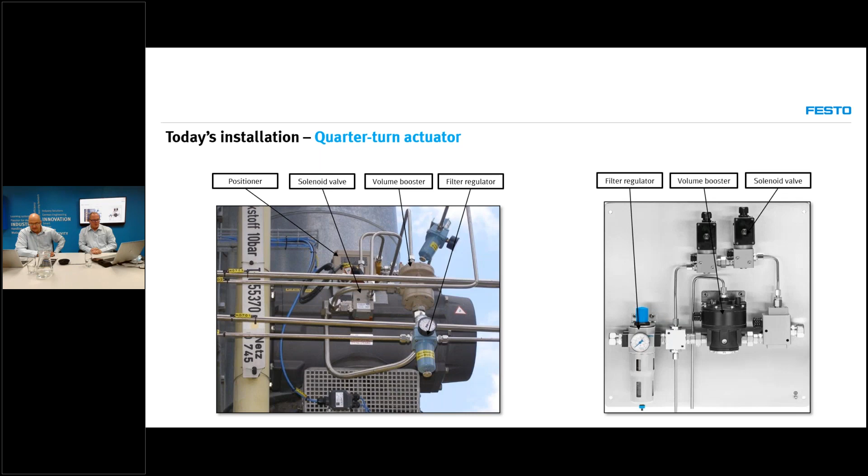Here's some more installations, right? And this is not atypical of what you find with the likes of Sasol, right? Yeah. So all of that now can be replaced with the Festo VTOP installation. So you can mount your positioner on the top end, and then to the right-hand side, you can mount a pressure regulator, a fail-safe unit, a volume booster, and so forth. So no need for additional complex pipe work. There's limited chance for leakages now.

I was about to say, less pipes, less leaks. And not just that, I mean, just think of the time and effort required to bend all those pipes and put them in place and ensure there's no leakage. And maintenance, to try to take it out, put it back in. Or if you want to change something. Oh, yeah, just make an adjustment. Exactly.

So the beauty of this, it works for both the linear and rotary applications. All right, so take a look at the image now. We've got a simple configuration. So we've got on the left-hand side a quarter-turn actuator with the first adapter plate. On top of that, you mount your positioner. Right. Thereafter, you've got a fail-safe unit. In other words, that's going to come from the PLC and say, listen here, close down because we have an emergency event of some sort, right?

A volume booster, if it's a very large actuator, so you pipe into that additional air supply, right? Or, for example, if you want a fail-safe condition and a filter regulator. And the beauty is you can change the order of those units around as you wish. So you aren't limited, for example, saying first must be a fail-safe valve and then the pressure regulator. There's no specific order. No sequence. Okay. Exactly.

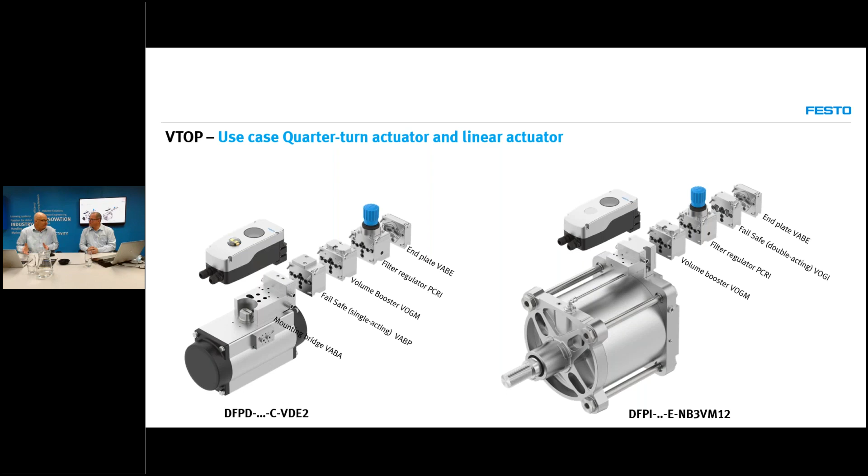And the same thing applies now for linear actuation. So once again, we had two images just now, both rotary and linear, and both have the same system in place, and both, of course, could be massive savings for the plant. I think not just the savings, but the ease of maintenance, and that might pay for itself. Well, you spoke about time and cost saving. That's one of the points we highlighted here. Ease and safer maintenance installation. So you know that once the system's installed, there's not going to be any leakages. There's no pipes flexing and coming apart and causing leakages. Less parts, less maintenance. Yeah.

Exactly. Flexible and function integration. So you can quite comfortably say, listen, I forgot I need a filter regulator, or actually it's changed up, now we need to have a larger volume, or for example, I need an ESD valve, and they can be added seamlessly, right? And then, of course, high availability means that these are standard off-the-shelf parts. You don't need to go and bend pipes to meet your requirements. This is off-the-shelf from Festo, boom, boom, boom, done.

And, of course, high reliability. You can imagine that with the flexing of pipe, the conditions outside, the environment, these pipes and the pipe connections are susceptible to leakages, right? You can rely on the fact that this will be in place and there'll be no leakage whatsoever. So we think it's a fantastic offer, and I don't know of anything else like this in the marketplace. So I'm really excited about this.

I think the pipe guys don't like you. I think that might be the case.

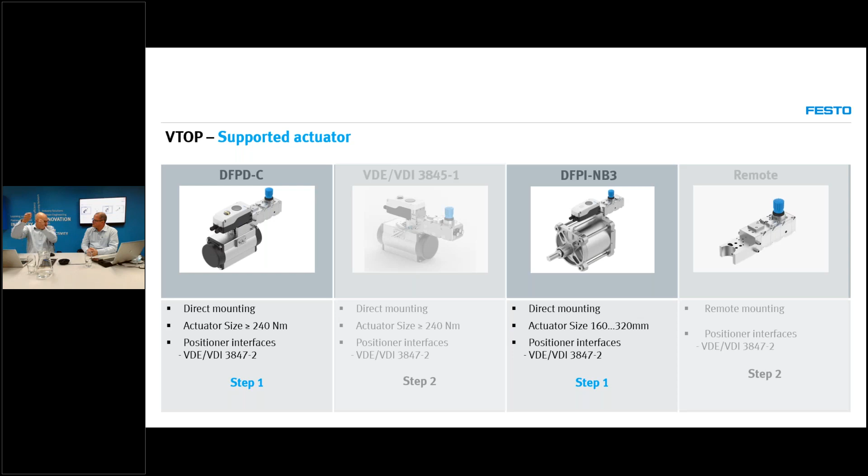The exciting part is, Marcus, this has been released for the DFPD C version quarter-turn actuator, but there are plans to release it for the generic quarter-turn actuator, so they're making adapters for that as well. It's also released for the linear actuator, and there's also a remote unit planned. So, for example, you mount this close to a device and just pipe two pipes into the actuator. All the functionality remains in place. You don't need a complex pipe network. You just pipe two pipes from this device to the actuator itself. Awesome. Okay. So that's all coming, right?

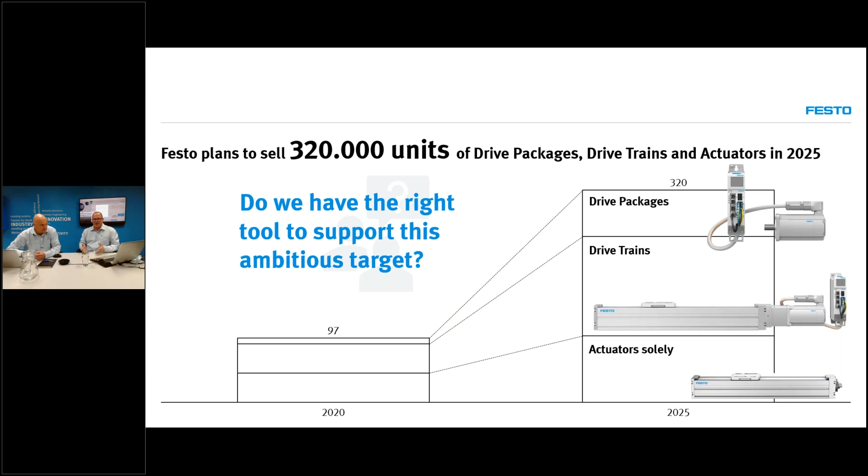So if you look at our existing supply, in 2020, we had 97,000 combinations, or we were targeting to sell 97,000 axes. And in 2025, we're targeting on selling 320,000 axes. So an axis is a motor controller combination without the mechanical axis. So if we want to sell 320,000, speed is of the essence. And we look at our total amount of products, and we know we've got 32,000 line items within Festo.

But when it comes to time, if you had to use the existing tool, Festo Positioning Drives, and you don't deselect the options, and you just go right through, it'll take 39 minutes for it to do the calculation. And to do a calculation, 39 minutes, who has that? I certainly don't. And that's where we start looking at old technology versus new technology.

So the old, if you look at PC-based software, we used to post guys the CD, or they now download the software, install it onto their PC. They have to continue to run updates. I don't know about you, but if you look at your phone every morning, you've got 5-6 updates that you need to do. But this is now web-based. Exactly. It's now web-based, so there's no more updates. So you go into the Festo website, once again, free, no charges for this software.

And I know all of our competitors out there that do a similar calculation, you have to buy that software from them. And why? Our thinking is you use our product, you use our parts, because it gives you a solution with everything added into your basket. But isn't there a concern when you close your software or application down on your computer, then you lose the parameters, lose the settings? Nothing. It stays there. So once you've configured everything, it stays in. That's the nice thing about this new tool.

So I'm assuming you can create a project of some sort to save it. Is it right? That's correct. You can. You can export it. You can take it directly onto the online shop. You can do quite a bit of that.

So with that, if you look at the easy sizing, there are 2 versions. The customer version, which is the easy version. You put in your parameters, it spits out a solution. You add it to the basket. Then we have the electric sizing pro, which isn't officially released yet. We're running beta versions, but that'll be for Festo internal use. And the only reason for that is that's where we want to tweak things.

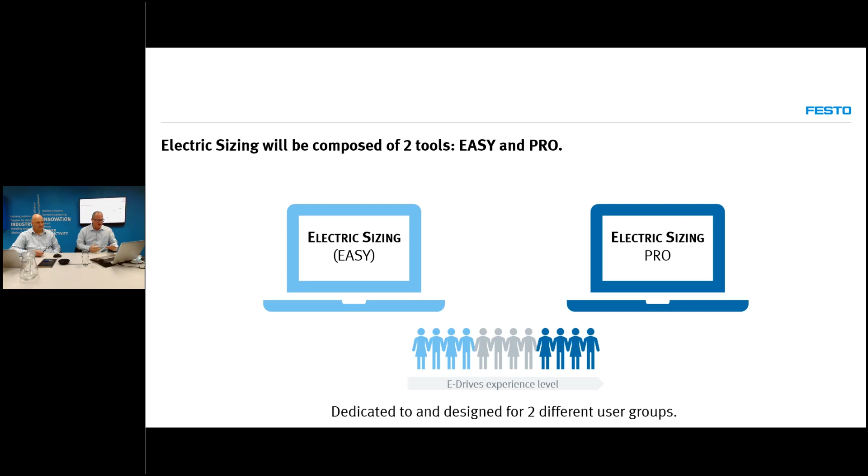So the two tools at a glance: designed for our customers and designed for the application engineers. The customers might do a design like this once a week. We want the customer to do a design like this once a day, order once a day, but they do it once a week, once a month, once every 6 months. Whereas we do it every day and we need more specialized tools. It's both online, so whenever you go online, it's the latest CMMT, EMMT controllers. If there's a tweak in the dynamics, they'll put it in there, so you don't have to update on a regular basis, and that's where it really benefits.

So if you look at the easy or the default profile for the customers, you get only the new products. So it's the new CMMT and EMMTs. It is the CMMO and the EMMB controllers. And right at the top, the Pro portfolios, where we then have the old stuff. So if we've got a customer that still has a certain range of motors in stock and he wants to use them, then we can play and pre-configure that.

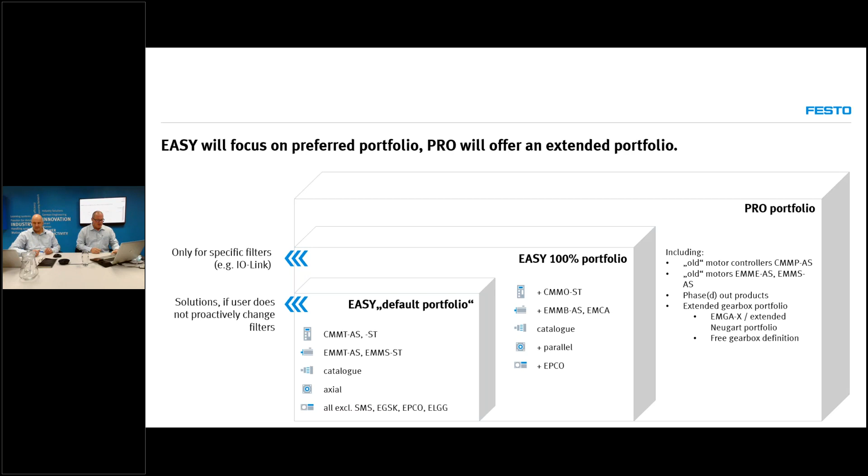Can he still then use the old software for that? He can still use the old software, yes. So the positioning drives is still available. We might still do 1 or 2 updates, but then it will stay in the background. But it won't take on the new products. It won't take on the new products. That's it. All right. So once again, it's free. There's no cost for this software.

And there must be a catch, Marcus. Yes, the catch is it's so easy just to add it into the basket. Why would you want to spend 5 minutes calculating and then go to a competitor that doesn't offer you the same tools and guarantee? So that's the nice thing. If you do the sizing on this and the solution doesn't work, we'll take it back. Because if our calculation software has done it wrong, it's our fault. Okay, so it hasn't happened as far as I know.

That hasn't happened. I've often said I'll put my application engineers' heads on the block, and I still have them. So I believe it's working. It's a damn pity that.

You've said it. All right, so the electric sizing and electric sizing pro. There's a couple others. There's Handling Guide online. There's the Festo online experience. You might have noticed our website's taken a change recently. It's all about these tools. So what I'm going to do is pause this screen and then open a website in the background.

And then I'm going to hand over to my colleague, Russell. So now, theoretically, we'll just hide that one. Put it over there. So can I tell you what the parameters should be? Ask me. I just want to see. Let's stick to where it is there. And then I'll simply then. I need to share screen. So bear with me while I'm trying to find the screen. Yep. I see the video right now.

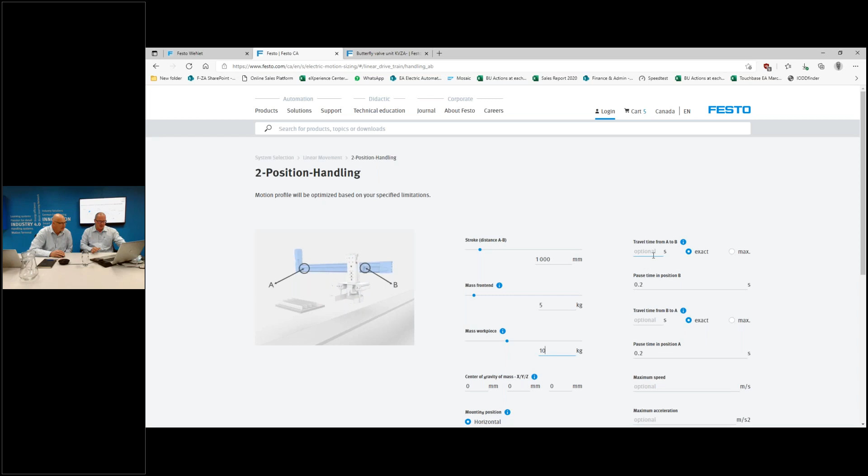So you click in there. No, not there. Click over there. Yep. And I'm going to say 5 seconds, and I want exact. I don't want it getting there in 4 seconds, 6 seconds; 5 seconds exact. So this means that if there are mechanical changes, environmental changes, it then compensates for that and always gives you the desired time. Is it right? That's it, yes. So how long is it going to take you to take the beer out? 2.5 seconds, the very most. Okay, so we're going to say 2.5 seconds.

And then I want the beer back in the same time, so back to me 5 seconds. Right. And I'm going to be a lot quicker. Click on for me how long it's going to wait here. I'm greedy, 1 second to get it out. You are very thirsty. I'm very thirsty. Okay. So scroll down, say continue. All right. And let's see if we've got it done.

So in the background, in those split seconds, it calculated exactly what I required and spat out the example for me. Yes, that is the answer. So at the start, it'll give you the most economical solution. So on the top, it's the most economic. You'll see that it is stepper. All right, so if you click on the little tab here that says show details. Yeah. All right, scroll down.

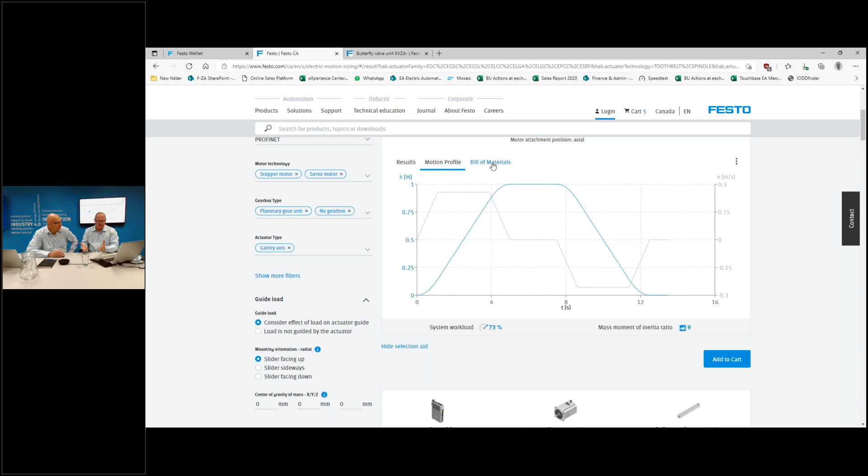There's the time, 13.5. So it took 5 seconds to you, 5 seconds to me, that was 10. Yeah. 2.5 for you to come out, that was 12.5. Yeah. And 1 second for me. 13.5 seconds on the dot. Guaranteed. Wow. So if you then click on the motion profile, it will tell you everything. That's how the motion profile runs with all the curves done. And bill of materials, that's exactly what I require for this job. Or you can just click there and say add to cart, and it's done.

So did I pass the electrical test, Marcus? You did, with flying colors. Thank you very much. 100%. It's nice to see that you're just as positive as me with this.

So end of the sizing there for us. I'm going to hand back to you with some angle seat valves. You know how many guys I see with angle seat valves out there that don't know we sold them? Yeah, there's a lot they actually don't know about what we sell these days, Marcus. Okay, so the VZXA has actually been around for a while. In fact, we have sold angle seat valves, believe it or not, for many, many years. The VZXF was what we began with, then they brought out the VZXA, and they've been promising to increase the range of the VZXA, and that's now come through.

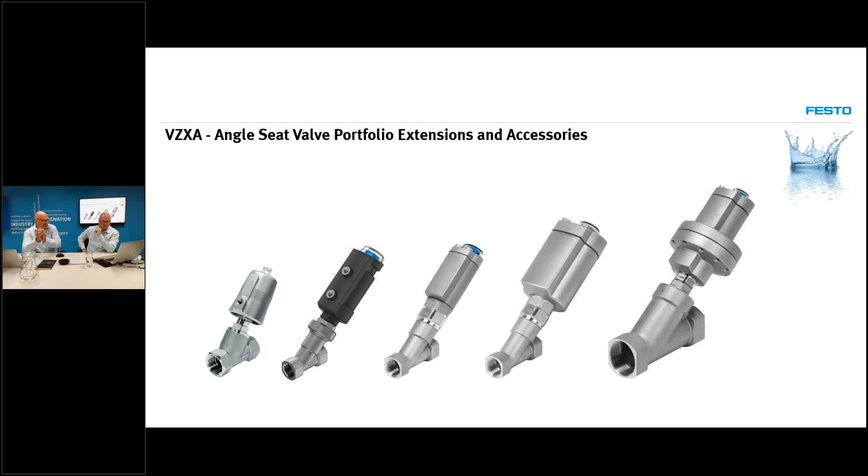So I'm very excited to talk about this because there's some very nice developments in this space. As I said, we can cater for the VZXF, which is in the basic range, so it really is on-off applications and no control, right? And it has limited interfaces. Then the VZXA has been around for the last 2-3 years, and it has been in an all stainless steel design, and sometimes possibly too pricey or too sophisticated for some applications.

So we have now introduced a polymer actuator, as well as a brass body now too, to extend the range itself, and some different sizes and different mounting interfaces. I must just say that with Festo, we're also bringing some exciting future products out. There will be some advanced control units coming out in the near future for the VZXA range, and I have seen some sneak previews of possibly some electric actuators too. Oh, that'll be interesting.

So let's go and take a look at what we have to offer at the moment. So this is what the current VZXA looks like. So open up so we can see the rest of the points here, and we'll talk about them now. One more. Just a second. There it is. Okay. So angle seat valves, generally speaking, provide you far more performance in terms of consistency of cycles and longer life cycles than a typical ball valve combination. So you're looking at 9 million switching cycles now.

Also, people often ask, when would I use a ball valve combination, or when would I use an angle seat? Well, if you've got high temperatures as well. So high performance in terms of cycles, and of course, high temperatures and low temperatures, from negative 30 degrees Celsius to 200 degrees Celsius. So great for cooling applications, and also fantastic for steam applications. I was about to say steam at that temperature. Perfect, exactly. And the other unique feature about this unit is, and we'll take a look at the image just now, you can separate the process angle seat body from the actuator itself.

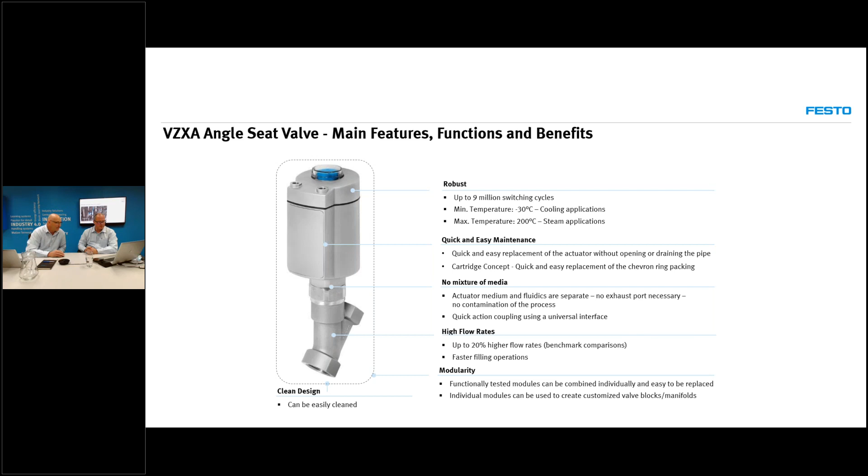You mentioned just now, take it easy. Take a look at the image at the moment, right? You can actually remove the actuator and the body remains in line, right? You can change out that valve mechanism, the cartridge itself. Okay. Right? So not the body, right? Or you can leave that intact if it's a problem, right? You can change the control head.

Say, for example, you had a medium in the line, but it's now changed, or the pressure's gone up. You require more force from the actual actuator. You simply screw the old one out and put a new one in with a bigger force. Okay. And you can actually remove the control head actuator from the line itself, and it has a non-return valve functionality. So up to 30 bar working pressure, medium pressure in the line itself. Remove the actuator, don't have to stop the process itself, put the new one in place. Sure. Okay. That's a big plus.

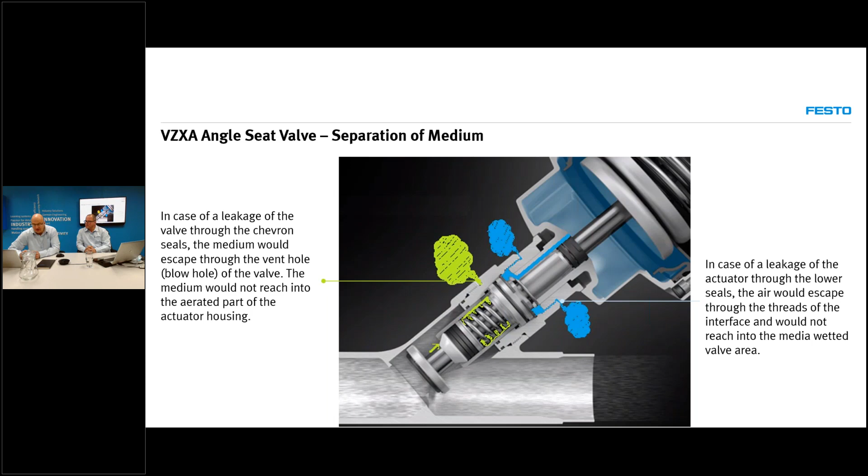I think so. I already mentioned to you that it also guarantees no mixing of the media itself and of course the air that comes from the actuator through a special chevron seal arrangement inside. So that's also another nice feature of the unit itself, right? And something else which is less commonly known, and as I said, this has been around for a couple of years now, so it's not a newcomer to the marketplace, right? It's just the range has been extended, and this is really growing in popularity.

With this splittable valve and actuator body, you can put the actual valve itself into a manifold. So you can create a purpose-made manifold for an application. Say, for example, you're in a tire plant, you want to mix different compounds together. For mixing and dosing applications, gases and steam and different media, you can run this through a purpose-made manifold, which you can design yourself or we can design for you, and simply screw in the angle seat cartridge and the relevant actuator. So that's really a neat function. Because you can split the two units, that's possible.

So I can create my own mixology tank where I can do 100% brandy, whiskey. You can add a Springbok shooter, a beer, and a brandy all together there. And it's not going to contaminate it. And I won't contaminate it either. Thank you. All right.

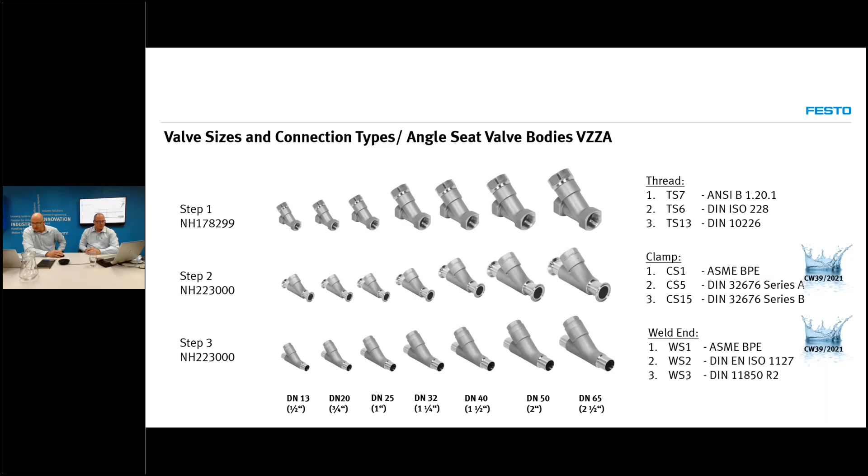And the exciting news now is in phase 3, we have gone from just the threaded version, from 1/2 inch to 2.5 inch, and we now have clamp versions as well, tri-clamp technology, as well as weld ends. So Festo has extended the range in stainless steel as well. So whatever the customer wants. Exactly. So that's new to the marketplace. Further to that, I need to point out that this unit can be used for vacuum as well. Again, not very common amongst angle seat valves, but ours does work with vacuum too.

We take a look at the recent accessories. What we didn't have is feedback other than optical feedback. So now we have inductive sensor feedback. You take off the visual indicator and screw in the Festo inductive sensor, or any inductive sensor for that matter, and that can give you precision sensing. You can also bolt to the top end; you can place on a cap with 2 Festo sensors. So you can actually get sensing at the back end and front end.

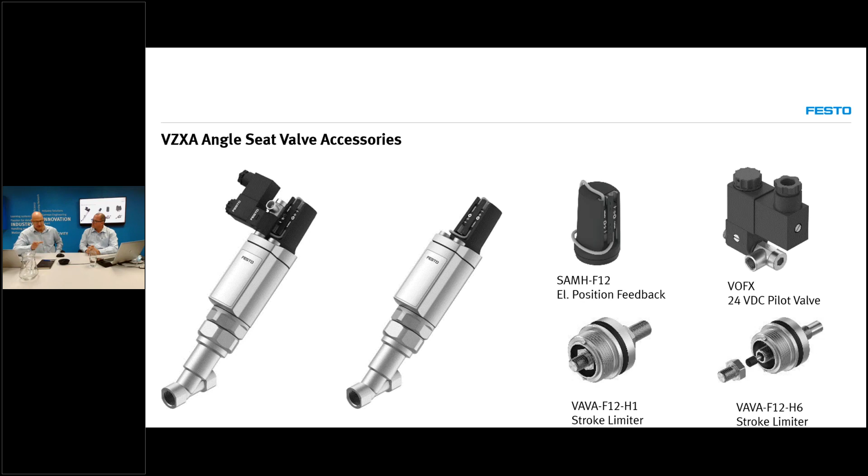You also now get a solenoid valve that banjo bolts into the unit itself. So you actually have direct actuation, almost like the NAMUR interface, on the actual actuator itself. So if you chose to have a solenoid valve on the actuator, that's possible now. Plus mechanical stroke limitation, plus an adjustable shock absorber too. So those are all new features, Marcus.

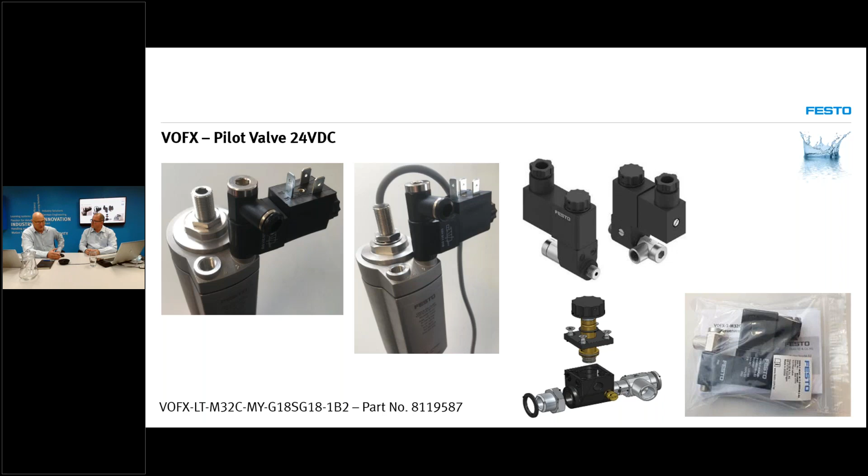That's how the inductive sensor looks. So you take off the visual indicator, you screw on the inductive sensor, and there's, of course, your one position indication. And then this is now the banjo bolt configuration for the valve, right? So very neat configuration from Festo. I need to say also very cost effective. A lot of companies sell you a control head, which is exceptionally pricey. This is a lot more affordable.

And talking about affordable, with Festo's polymer actuator and the brass body now, we really have dipped into the very affordable price range for angle seat valves. If you take a look at the comparison, it still retains the same modularity. For example, the ability to remove the actuator from the body itself still remains. But because of the materials and their composition, it's very price effective. However, Festo has used eco brass in the design, which means there's no lead content.

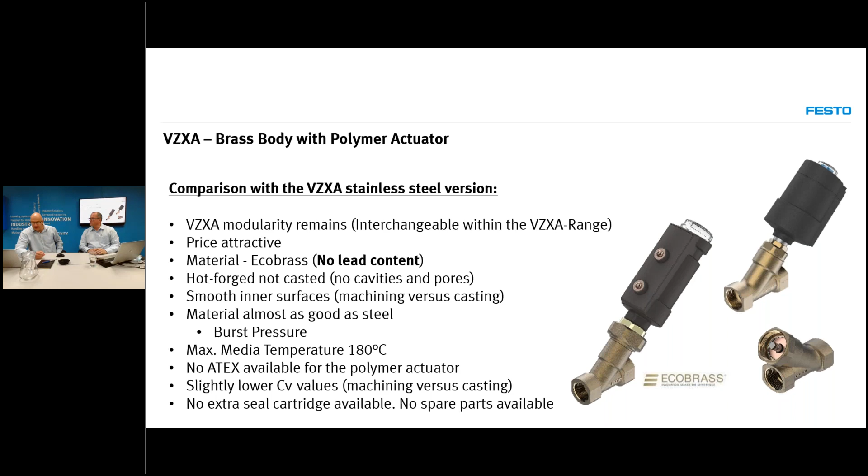It's hot forged and not cast, which means there's no cavities and pores. And a whole bunch of competitors use casting, right? That results in a smooth interface. It still can do a fairly high temperature, 180 degrees Celsius. However, there's no ATEX certification, but it's available in the stainless steel version. There's slightly lower CV values, or flow characteristics, than the stainless steel version because of the casting. And there's no extra seal cartridges available. However, it is super affordable.

We take a look at the two units. The top unit is the piston actuator, with the indicator on the top end. And below is the VZXA, the brass valve. You can see that is from -10 to 180 degrees Celsius with PTFE seating, which is industry standard. And it comes in 1/2 inch to 1 1/4. Awesome. So I'm quite excited about this range. I believe it's what we're looking for without compromising quality. Yes. We have a price attractive offering now too.

A lot of people out there still believe Festo is just a pneumatic company. From what we've shown them today, we do a lot more than just the blue parts and fittings. We do angle seat valves, PLCs, process valves, and it's amazing that we do all of that in-house. Years ago there was a perception Festo was expensive as well. But within the PLC range, the mechanical axes, the process equipment, from the angle seat valve to the DFPC, these products are very price attractive. I challenge the guys out there, if they still think Festo is expensive, give us a chance. Put us to the test, and you'll be pleasantly surprised.

Talking about pleasantly surprised, if you look at the Festo automation portfolio on the electric side, we've got our Festo automation suite with the CPX-E CC, which we've gone through. We've got the PLC and servo axes, the mechanical axes, and the servo drive and servo motor. So a complete motion package from one supplier. What's nice is there's guarantees, things that mount. You don't need specialized brackets to get your motors onto the axis. It's all within one package. So we're going to have a look at the CMMT extra low voltage and normal servo drives, as well as the single cable technology motor.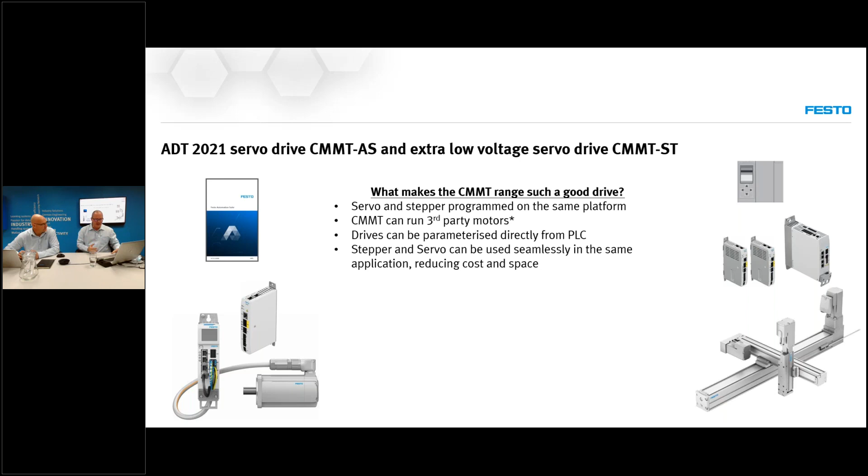Then, of course, stepper and servo can be used seamlessly in the same panel. So now why? We've got a smaller stepper drive, which I'll show you now. With a servo in one panel, we saved space, we saved the cost, because they need accuracy, they need repeatability, but they don't need the high speed and high dynamics of servo, and you can use the 2 without sacrificing any performance.

So on your screen, you'll see a photo of one of the panels we've recently done, where we've got our CPX-E motion controller, or PLC, doing some control. And you'll notice that on the side, there's EtherCAT load cells, there's EtherCAT VSDs, and then, of course, these CMMT servo drives. So you might see that it's nice and compact, right up against each other with integrated braking resistors in the back. Don't you require space in between and a fan of some sorts there?

Not with these. So because the heatsink is in the back of the drive, it mounts directly onto the panel. It means you can have them a lot closer together and therefore save a lot of space in your panel. Sure, that's very compact, eh? So let's look at a couple of the highlights of the extra low voltage servo.

So this little servo controller is up to 300 watt stepper control. So 48 volt, 300 watts. So quite a powerful little stepper controller out there, and it's tiny. It's not much bigger than a cell phone at this point in time.

So if you look at this, you'll notice that we've got EtherCAT, Ethernet IP, Modbus, and Profinet, and the Festo automation suite. So all the dynamic point-to-point or interpolated function blocks are all the same for this extra low voltage servo as well as for the big boy, the full servo system. So you can run EtherCAT, Ethernet IP, Modbus, and you said Profinet for the new units? Yes. That's both for stepper and for servo. That's correct. So same topology, same function blocks, it just makes it a lot easier for the installation process.

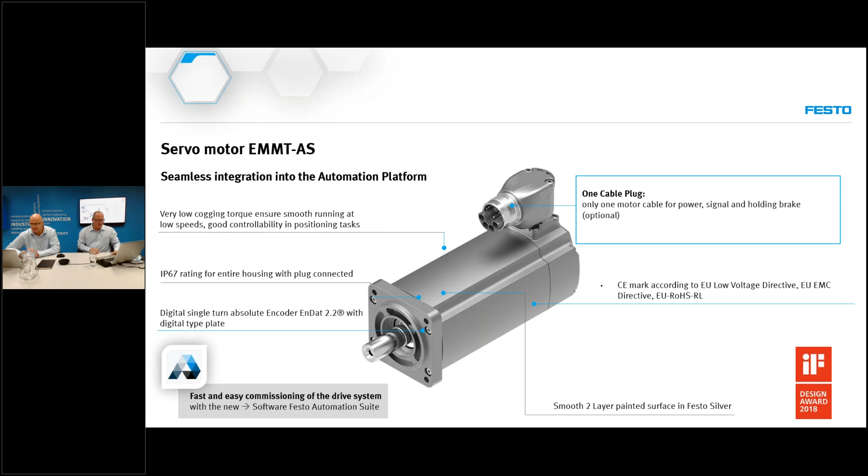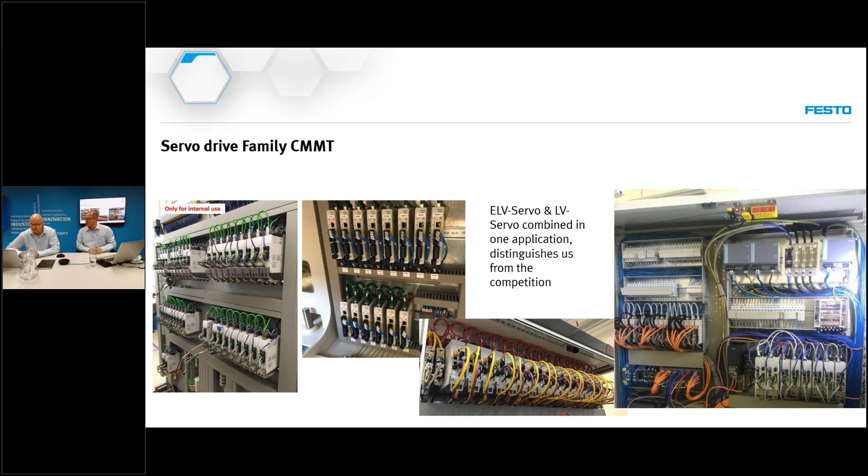Nice. So some of the benefits of running them together is, of course, there's a huge price advantage of running a servo and an extra low voltage servo in the same panel. We look at the same behavior over the panel, same programming platform, all just to make it easier for our customers. So yeah, we've got a photo of one of our customers that have combined the servo and the extra low voltage servo. So you can see that's a massive amount of drives right next to each other in the same panel, saving a lot of space. So we like having a lot of servo drives sold, but when you're tight for price, look at this extra low voltage stepper. You'll be very surprised at its performance.

Now we've been talking about these function blocks. So in motion, we have point to point. We've been moving our case of beer from me to you, or if you want to do a gluing application, we do a bit of interpolated motion where we do arcs and bends. Both the stepper and the servo have the same function block. So you can do gluing applications with a stepper. So you can follow a predefined path with a stepper controller. So you don't need a servo. It comes back down to the design. So sit with your application engineer, bring those applications, and let's see what we can do. I always thought that you're limited with the complexity of the motion path with a stepper, but that's saying a lot, Dan. It does.

As soon as you put that encoder on, you've got servo-like characteristics without that price tag. You know, if you're not wanting to glue this table in a millisecond, but you want to have consistency, repeatability, our stepper solution can do it.

Are you trying to sell Siemens now? No, but Siemens is the biggest PLC supplier out there. So that's where Festo really is different. We don't care what PLC. We like it if you run a Festo PLC, but you can run Allen Bradley, Siemens, Rockwell, which is Allen Bradley, Omron, Beckhoff. All of our controllers are designed with the same function blocks.

So for instance, in Siemens, if you go to a Siemens programmer and you say to him, which telegram do you want to send the parameters? He already hears telegrams. What are you talking about? So the same telegram 111 that they use from a Siemens to a Siemens controller, they can use from that PLC to ours. Exactly. So same naming convention, same function block. It looks the same. It pretty much is the same. Now, if you look at the SinaPos function block, the same speed that they use, it's exactly the same.

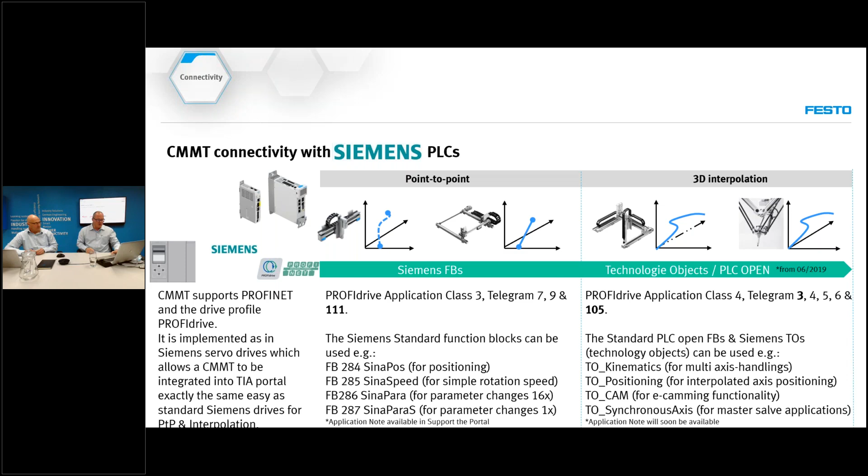Do we write those function blocks for them pre? Yeah. So from Festo, we've predefined those function blocks so that they look the same. So when you download it into your PLC, you just download the Festo version of it, and it's done. So on those third-party stepper motors, if you need an IP65 stepper motor, or you need one with an absolute encoder, or you've got a whole bunch of stepper motors and you want to use our controllers, give us a shot. We can most often run that.

So if we look at the drive portfolio, from 50 watt all the way up to 6 kilowatt is what we've got in our armory now. We're going up to 12 kilowatt, and next year we'll have our 12 kilowatt launch. But even that being said, 85% of the applications currently being done in the factory automation space can be catered with this power range. So 85% of those applications we can do with our existing 6 kilowatt is substantial, Marcus. That's a big boy. So yeah, if you've got any applications where you need a servo drive, you want to test or even play, give us a shot. Here in the Experience Center, we often do that.

So over to you, and I see some PCRP, and then we're almost 20 minutes. Almost in the home stretch now. Yeah, we're in the home stretch.

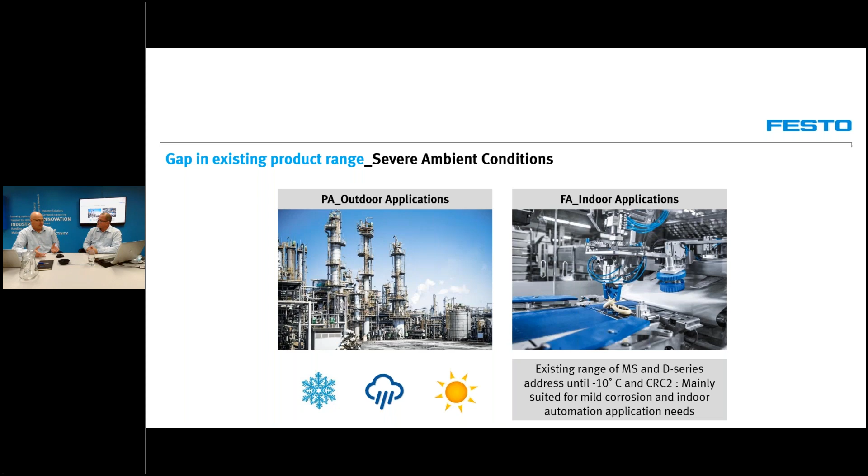Okay, so Marcus, the PCRP once again has been designed with a very aggressive, harsh environment in mind. So if you've seen plants in the past exposed to chemicals and corrosive materials and gases and, for example, wash down stuff, like you find in the chemical industry and the mining industry, these devices often get damaged by the environment and, of course, premature failures. So what you often find then is people mount them into panels. And a filter regulator in the panel makes no sense in terms of economy of scale. And it also takes the space.

So Festo said, listen, we need to create something which is going to be impervious to local conditions. So here you can see the panels where the filter regulator has been placed. And as I said, that's not making financial sense. Yes. So we brought out what they call the PCRP. It's a fully stainless steel regulator from top to bottom. So even the cartridge inside is made from stainless steel. We'll get to it shortly.

Okay, let's just take a look at some of the key features right now. So in NPT thread or G thread, quarter inch or half inch, as I said, the housing from top to bottom is stainless steel, 316L. From -20 to 80 degrees Celsius, or from -60. That's even colder than the -40 we spoke about earlier on, right? These Russians. To 80 degrees Celsius.

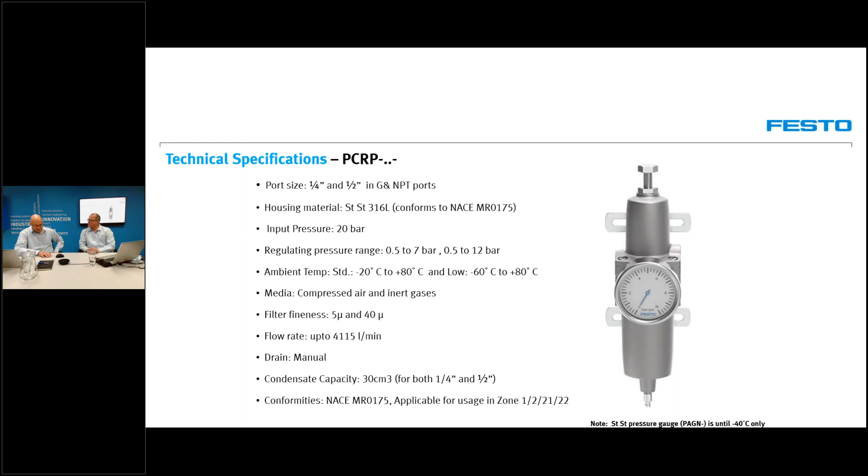Filter cartridges from 5 microns to 40 microns, a manual drain, and it conforms to lots and lots of explosion-proof environments as well. So you have all the certifications required. Okay, so it is really an all-rounder. I won't go into the technical design itself. What I want to point out here, though, is that we have this barb fitting at the bottom end, which means you don't require a hose clamp to put it over and connect it.

If you want to take the condensate down to a bottom point somewhere, join the point, we have a barb fitting. So you take a 6mm tubing, you obviously crimp it over, and it's done. Okay. And as I said, all the accessories are also stainless steel, and also all available from Festo. So from the gauge to the bracket to mount it, to even the insert, the filter cartridge itself.

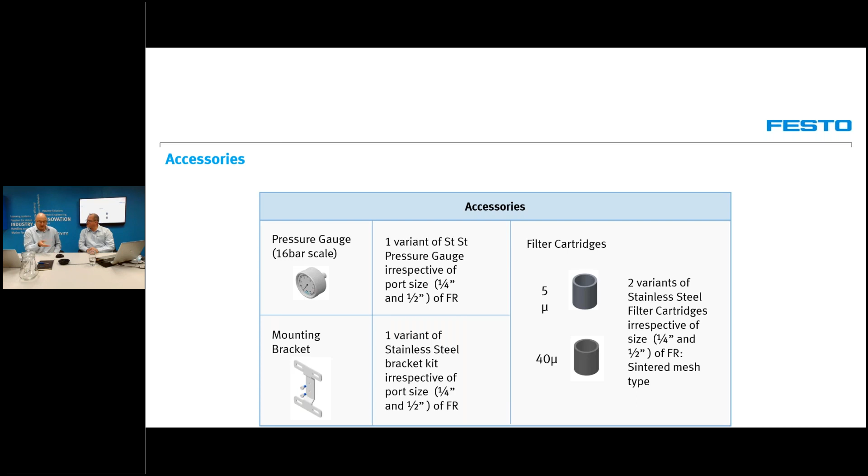Normally you have the sinter bronze filter cartridge. Once again, stainless steel. So really, I think a neat product at a very affordable price. Okay. Awesome. How was that for quick?

That was quick. Okay. Now you've had a chance to show me how your online configurators work, and I'd like to do the same. So could I ask you to drive the machine and I can talk you through it? I'm going to try, but just don't laugh at me. I won't. So let's share screen 1.

Okay. So Marcus, and for the audience out there, you should be aware of this already, but if not, you have to get onto the website to take a look at it. We have 3 configurators: a butterfly valve configurator, a ball valve configurator, and an actuator configurator. And by configurators, I mean if, for example, you require a butterfly valve with actuator, with adapters, with a NAMUR valve, with a switch box, you can do that online.

And like you said in the past, very often you forget the adapter, or you forget the right mounting bracket. So the components to make the assembly come incomplete to your stores or to your facility. This makes sure that in a couple of clicks you do it right. Awesome. So I've asked you to choose the butterfly valve configurator online already, but we have the ball valve and we have the actuator itself.